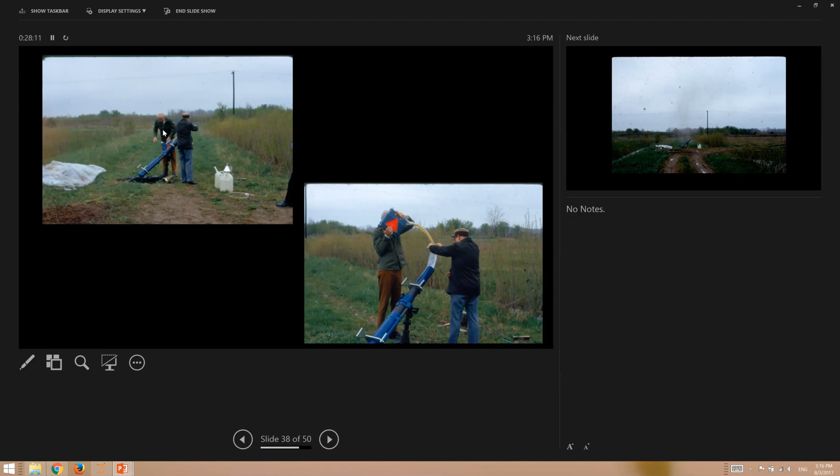And this is all there is, water vapor. And we traced SH wave refraction for 2 miles. Now, it wasn't a 2-mile wavelength, but we were able to trace refraction using the SH component.

So I've shown you sort of the old man's version of plucking and steady state, and I hope that we can agree that it's mainly a matter of scale. Thank you.

Sir, how many real mortars have you fired? I'm sorry, how many what? Real mortars. Real mortars that I fired. Yeah, maybe a Pendleton or something like that. One. Several times, but it was the same mortar.

Okay. Now, the Swiss have started to explore that same concept, and they built just a vertical column with an explosive chamber at the bottom and filled it with water. They could make the chamber longer or shorter depending on how long they wanted the pulse. And they tested a bridge that way, but apparently it was not particularly cost-effective or technically effective, and they did it only once.

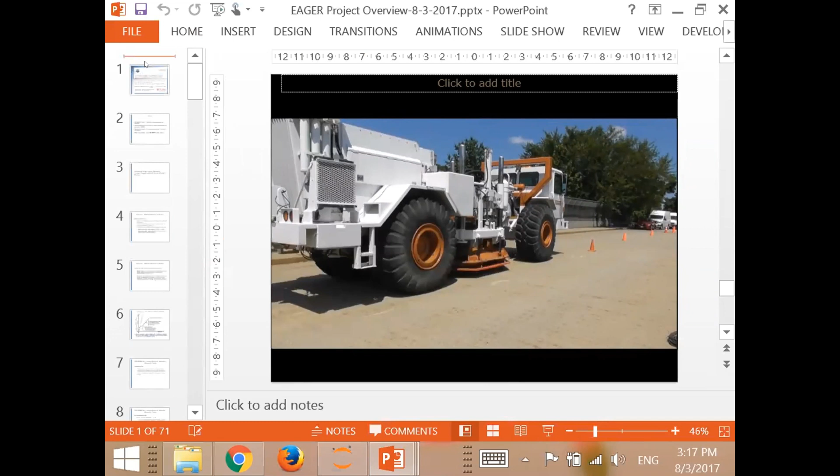Okay, well, thank you, Professor Woods, for discussing that. You have been a pioneer in dynamic testing for many years. You just like him because he's a sharpshooter. Yeah, he's a great sharpshooter, so be careful. That is true as well, I'm sure.

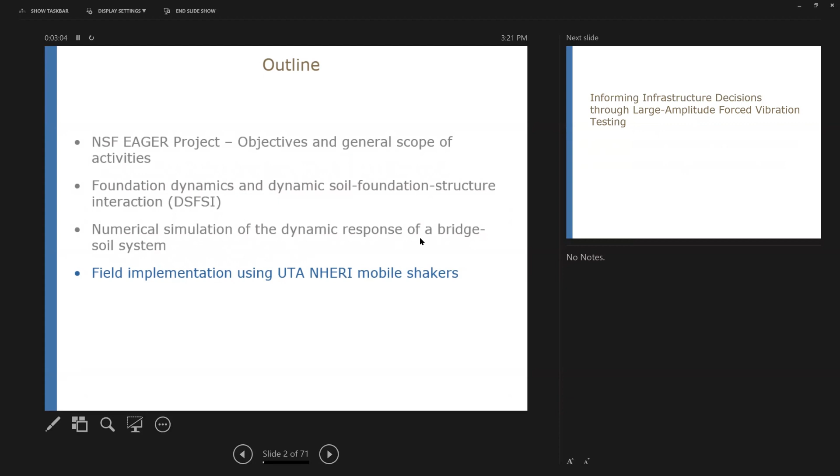So what are we expecting to see in our bridge? Very briefly, I will also say a bit about another activity going in parallel, related to numerical simulation of these bridge soil systems. But most of the presentation will be related to field implementation, because that is why this workshop was organized.

Okay, so this is the name of the project: informing infrastructure decisions through large amplitude forced vibration testing.

So a little bit about motivation for this research. We are all well aware that we are dealing with aging infrastructure, and as such we would certainly like to have some kind of tools where we can make safety assessments.

How we typically assess those structures, there is the whole field of structural identification, and my colleague Frank Moon will speak about it, that is his area. There were huge advances in the past few decades in terms of sensing technologies, simulation models, and procedures or algorithms developed for calibration of those models.

This is where Professor Woods' talk perfectly fits. What is the problem? The problem is what kind of input we have in our testing. If we speak about static loading, there's pull release, impact, shakers - these are all still relatively low-level inputs, which can provide information only maybe similar to operational limit states. So we do not get information which would give hints about what we can expect regarding the performance of structures once we get to extreme events. That's what we would like to do by introducing high intensity loads using mobile shakers.

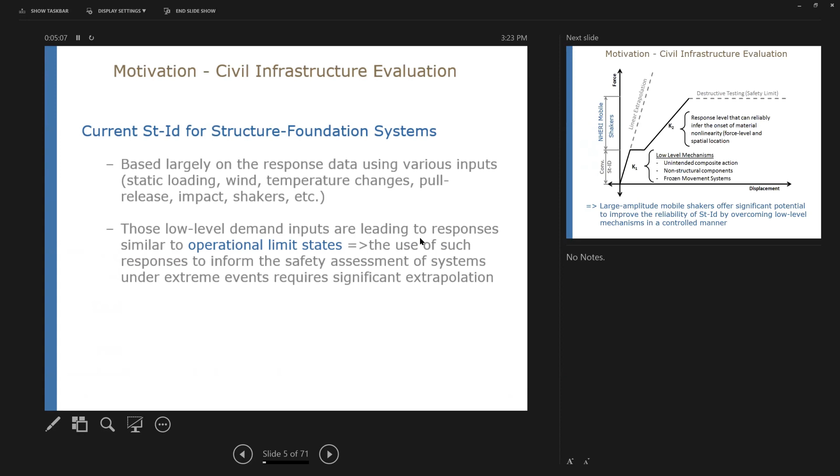This could also be illustrated this way. What we can say is that conventional structural identification is in a zone where we also have low-level mechanisms, like unintended composite actions, non-structural components, frozen movement systems. Like for our bridge, it could be.

This doesn't show. Yeah, oh, this one is better.

And we can say that we can approach the safety limit. As you're going to see, this is what we are trying to see, and there will be a brief discussion: are we starting to see any non-linearities by applying loading from shakers?

Okay, so very directly about the goal of the project. This is our overarching goal: to explore and hopefully establish the ability of these shakers to be used in performance evaluation of structures and prediction of future performance. But there is one distinction - unlike how we are currently evaluating bridges, we would also like to bring into consideration dynamic soil structure interaction.

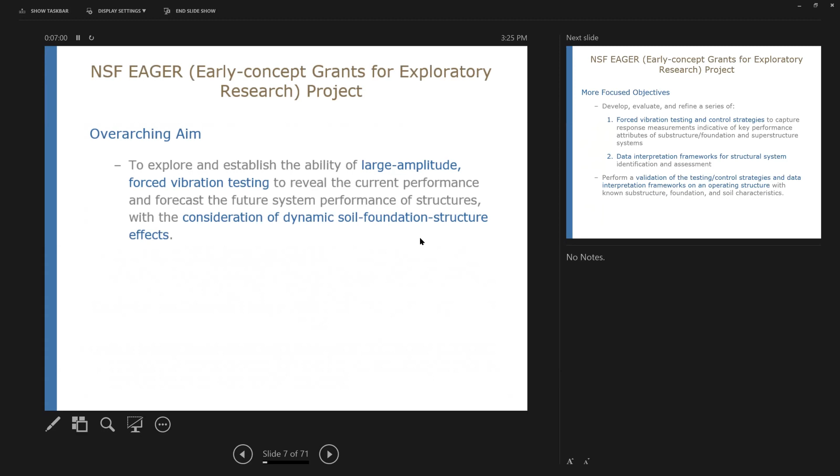So how to develop data interpretation frameworks - if we go on a bridge, how can we interpret that data to get an understanding of the performance of structures. And finally, what we identified in the proposal, this is why we are here today: once we develop these strategies for testing and for data analysis, can we validate them by deploying our mobile shakers on a bridge and analyzing the data?

Okay, so probably we can skip all of those.

As you're going to see later as we start describing our validation testing, when we were thinking about what we would like to do - yes, this would be ideal, that we deploy this high intensity shaking on the bridge structure and evaluate the response, not just of the structure but also of the ground. We hope we will be able to infer from measurement of those vibrations of the ground the significance of dynamic soil structure interaction.

For those who are not that familiar with foundation dynamics and some basic facts about dynamic soil structure interaction: what we are trying to encompass in evaluation of the dynamic response is loss of energy through wave propagation, which is not being considered. Structural models are mostly assuming a fixed base.

If we think about the effects of soil and soil structure interaction, something more familiar is that soil, when talking about earthquake loading, leads to amplification of motion. But regarding the effect of soil on dynamic soil structure interaction, first soil flexibility changes the flexibility of the overall system, and the fundamental frequency of that joint system goes down.

What is a very important effect, and you are going to see some results even from, I guess, the mid-60s in Professor Woods' book, is that this radiation of energy through wave propagation causes a major increase in the overall equivalent damping ratio of the soil structure system.

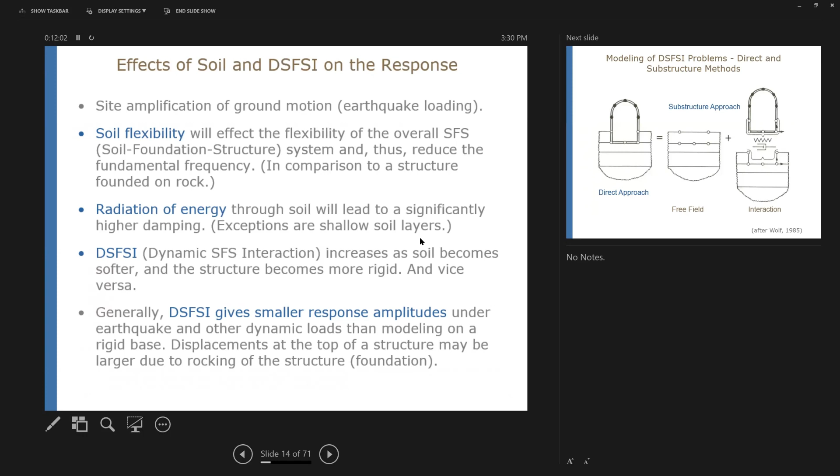Now, what is important for the modeling, which I will briefly describe: we can always do modeling of these soil structure interaction problems using the direct approach, which means we model everything together. That is going to quadruple or even more the computational power needed to analyze such structures.

The other approach is the substructure approach, which pretty much describes the problem for earthquake loading analysis. In general, what we are trying to do is separately describe the soil system and separately the structure. So we analyze the soil system to develop what we describe as impedance functions, and those impedance functions are then attached to the base of the structure.

So what are those impedance functions? These are different solutions developed from analytical or numerical solutions for any possible situation: any shape of foundation, surface or embedded, on or in a layered system. Various kinds of solutions, but in most cases we can describe those in a very simple form as described here by this expression.

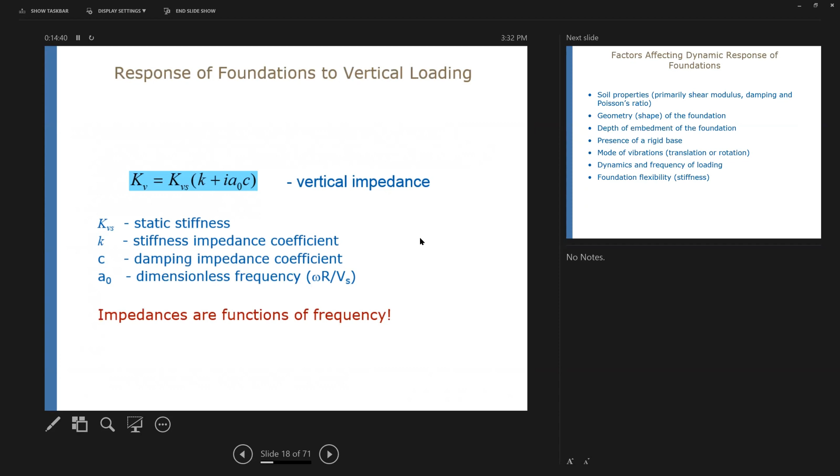And they depend on many elements. They depend on soil properties, primarily shear modulus, damping, and Poisson's ratio. They depend on shape of the foundation, depth of embedment, presence of a rigid base. And we are thinking that on our site, Hobson Avenue Bridge, where we will go tomorrow, we might have this situation where we are testing on a stratum. It will also depend on mode of vibration, dynamics and frequency of loading, and foundation flexibility.

So just very briefly to show some of these: there are various modes, translational modes and rotational modes. You will see that we will be primarily interested, on our bridge, in the vertical and swaying modes.

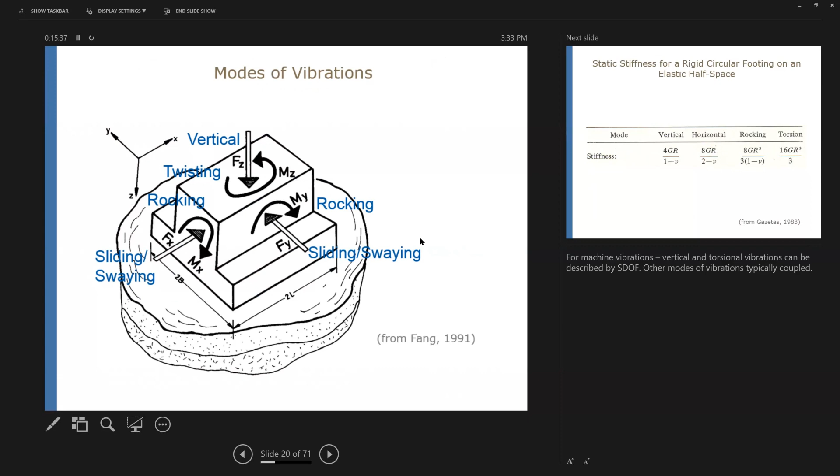So just a simple example: let's say this is for a circular foundation on a half space. Static stiffnesses will look like this, with modulus of soil, shear modulus of soil, radius, and Poisson's ratio as components. While those stiffness and damping coefficients are, as we said, a function of frequency, and as you can see, they can vary significantly.

Okay, going to the research from the 60s and Professor Woods' book. So here you can see, for those who are from structures, you know that you are typically dealing with damping ratios of about 2-3%.

If you look at what would be the damping ratio for a foundation or any kind of rigid structure on soil, these are so-called mass ratio, and if that structure is light, we might get damping ratios, for example, for vertical motion on the order of 40%.

As you can see, translational modes are more damped than rotational modes, so rocking is providing lower damping.

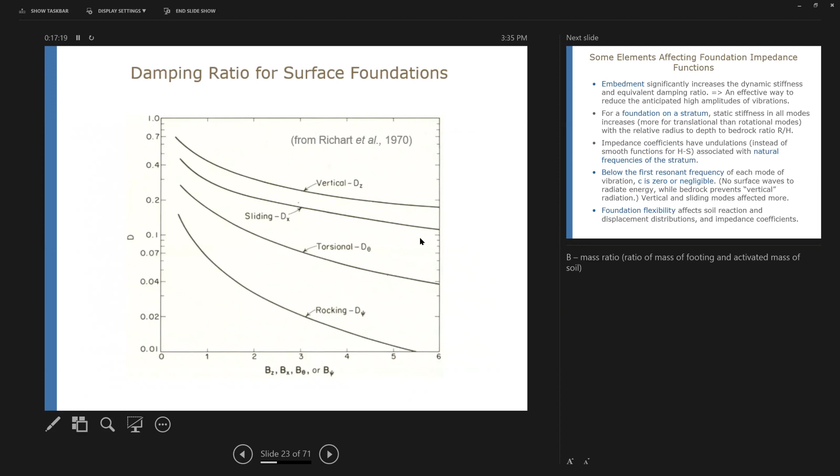I think for the sake of time, I'm going to skip some of those. This might be of interest for what we are currently doing on our bridge. I said that we might have below us a stratum based on some measurements.

If that is the case, every stratum has its own natural frequency, and if you excite at that frequency, what you get for the foundation is very low damping. For low frequencies, which is typically the fundamental frequency of the stratum, you have very low damping. The reason is there is very little surface wave propagation, and body waves, as they propagate, cannot propagate - they are simply reflected, so you are not propagating energy.

Okay, we can probably skip some of those. These impedances we have implemented into our numerical models to conduct a parametric study to evaluate what is important for the response of this bridge-soil system. We are not going to speak much about the results, but we can show at least what we are doing.

First we started at the very beginning with this 2D model of a hypothetical bridge. We probably spent almost 9 months identifying the bridge and getting permission to do the testing, so we did not know what was going to be the bridge - we were conducting the study on a hypothetical bridge structure.

The first analysis was done on 2D models, Sharif Farag was doing the study, and as you can see, the variables we concentrated on were the soil velocity, which we varied between 200 and 400.

We assumed we are talking about circular footings under piers, and we also varied column height - this ratio between column height, or the height of the building, and the width of the building, which we typically call slenderness ratio. What is important about this slenderness ratio is that if you have a higher slenderness ratio, the rocking motion of the building becomes more significant.

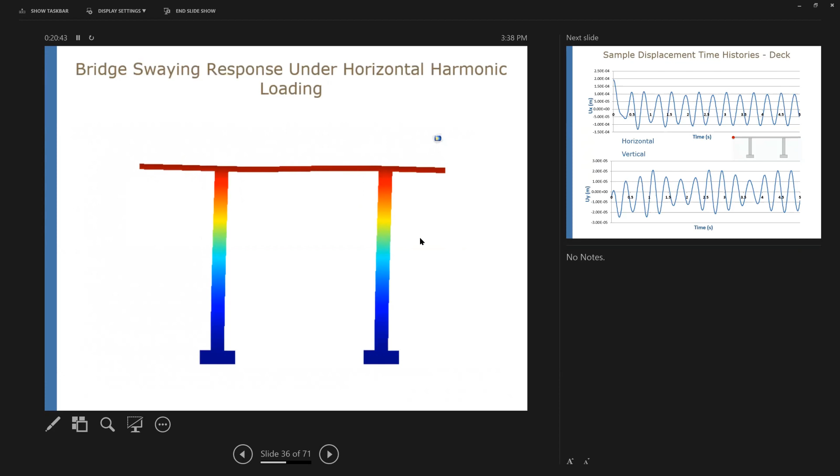You can see, for example, for one particular frequency, this would be for this point on the deck - harmonic loading, and we can see harmonic response. Clearly for the vertical motion of this point, it seems like there is a superposition of two motions: one might be as a result of tilting, another one of maybe the footing moving up and down.

Similarly, what we could evaluate from there is what is happening with the foundation. You can see that as we have this horizontal excitation, we are at the same time observing horizontal sliding of the foundation, and we are also observing rotation, rocking of the footing at the same frequency.

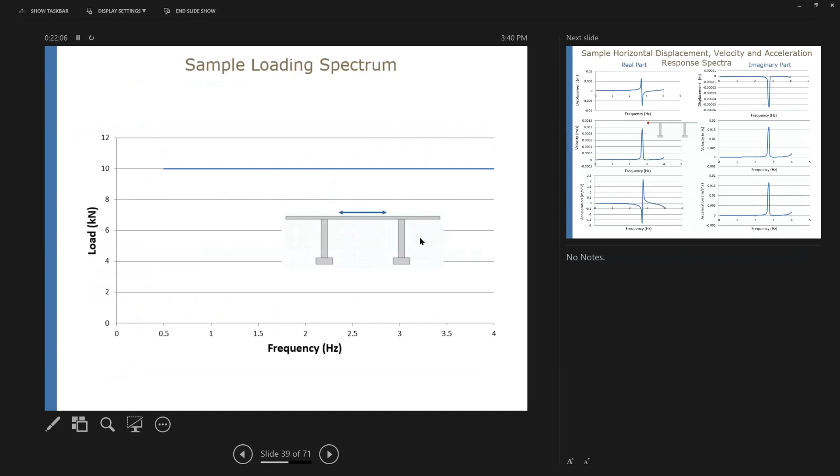The data were looked at in the time domain, but also in the frequency domain. So if this was our loading spectrum, for a range of frequencies of interest, say from 0.5 to 4 Hertz, with unit loading, we looked into various scenarios for what kind of responses we are going to get at any point on the structure or the foundation - how the spectra look, not just displacement spectra but also velocity and acceleration spectra, which will be of higher interest as we compare with our field data.

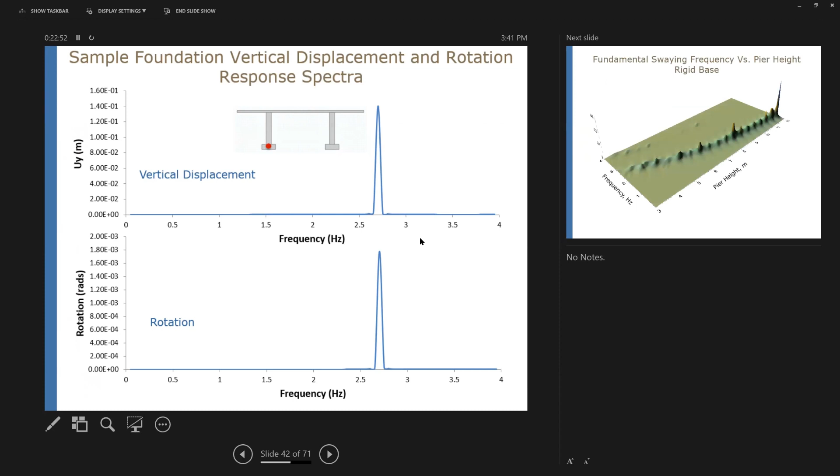Okay, similarly you can see for the rotation - there is this general fundamental frequency of this soil-structure system, and if you compare this frequency, it would be the same as for the superstructure.

We are looking into how we can present this data, and as you can see, for example, if we would increase pier height, which means increase the slenderness ratio, we would see a decrease in the fundamental frequency of the overall structure in this swaying motion.

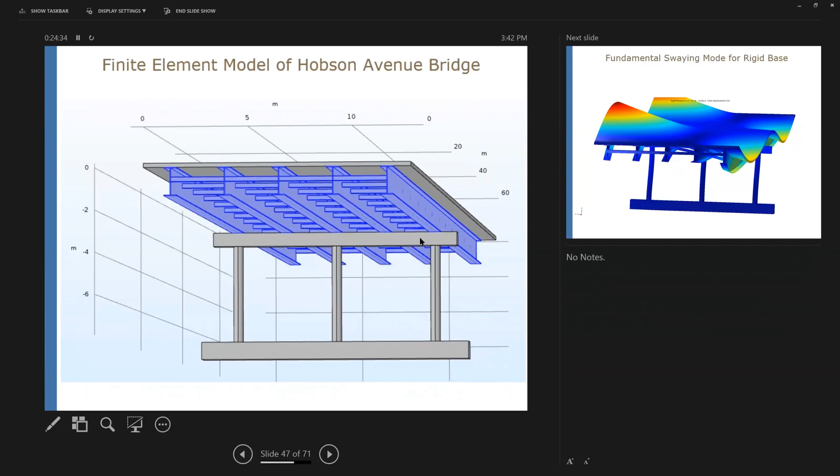And here you can see, so for example, if we went with the assumption that we have a rigid base, this is what would be the fundamental swaying mode of this bridge. It would be good to hear once we get results from the bridge deck whether the bridge deck is really doing something like this. Is that realistic?

I think it is. I felt it the other day, standing mid-span at the end. Everybody can judge tomorrow on the shape. You'll know. Okay, so maybe one number to remember, 4.7 Hertz was the numerical model.

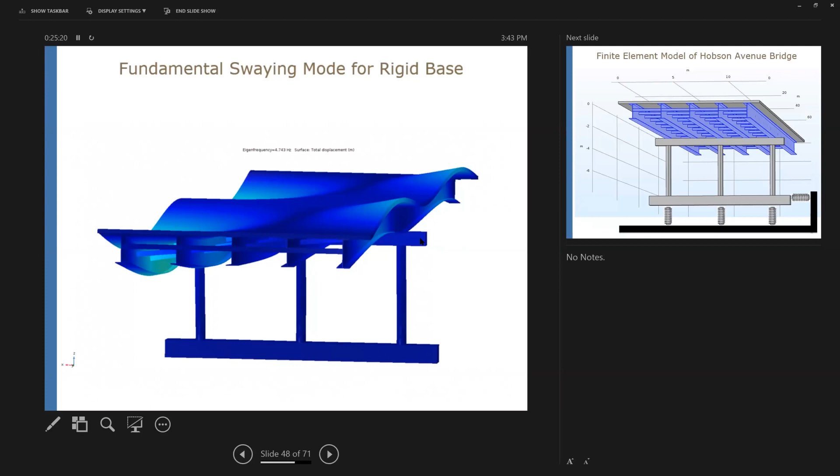But the same model was analyzed by including also impedance functions. So as you can see on the foundation, we were thinking of what should be the best model. Yes, the best model would be a large numerical model of the soil with embedded foundation, and we evaluated impedances that way.

But if we used existing solutions, should we use a single or multiple? Considering the length of the foundation, we felt it would be better to support with separate impedances below each of the piers. So there are three sets of springs, and it doesn't mean just these. There are also rotational springs which are not plotted here, which prevent rocking.

And what you can see now is that we are starting to see real rocking of this foundation. As a result, unfortunately this number is too small. If you remember, for rigid foundation it was 4.75; this one is about 4.65. So we got a decrease in the fundamental frequency of about 0.1 Hertz. But this is for the assumed soil conditions, and I think what we used, 200 meters per second, is higher than the actual velocity.

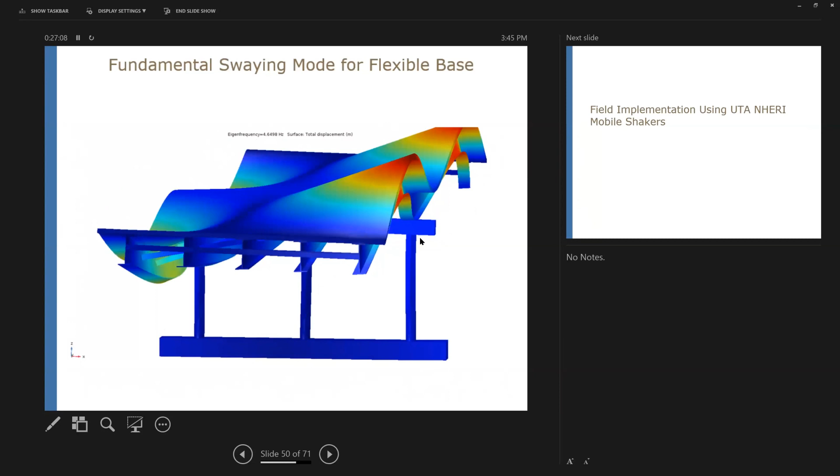Okay, so let's go to the most interesting part, and that is related to the deployment of University of Texas mobile shakers, in particular T-Rex.

So what are the objectives of our work? Well, the primary objective is to measure the response of all components, meaning components on the superstructure and substructure. Unfortunately, we could not dig down to the foundation, but we have placed so many sensors close to it that we can say it's almost the foundation and the ground in the vicinity of the structure.

We would also like to assess transmissibility, the transfer of motion between different components of this soil-structure system. We'd also like to see if we can use mobile shakers to at least estimate foundation impedances. Chances will probably be highest for vertical impedance, since the mobile shaker was placed directly above the foundation and the loading is through the piers. So for vertical impedance we might be the closest, but maybe we can think about our own inversion procedures to get a feel for the other impedances.

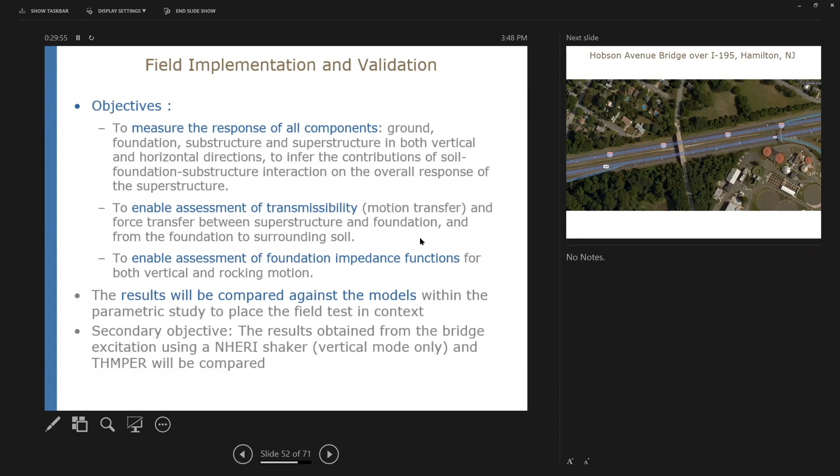Okay, a little bit about the bridge. So the bridge is approximately 30 miles south of here in Hamilton Township. It is crossing Interstate I-195, which runs east-west across New Jersey. We can say it's east of Trenton.

So it is a two-span bridge, continuous span, steel girders with a concrete bridge deck on steel girders. It is about 40 feet wide, so you can see, 40 feet. We have a sidewalk of about 6 feet on the western side.

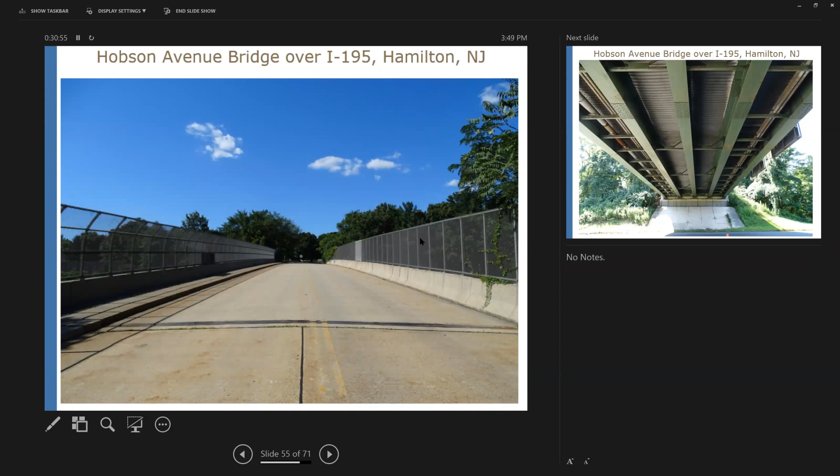So just a little bit of a look into the superstructure. Steel girders, 5 steel girders, continuous girders, supporting a concrete bridge deck.

The first part of the testing was on Monday when we first deployed all of the sensors on the ground. But we also used this as an opportunity to characterize the ground, because even the boring information we had was at locations a little bit away from the bridge, not on the bridge side.

The UT team deployed sensors and conducted MASW, multi-channel analysis of surface waves, along this line. An array of 24 geophones was deployed, and you'll see a little bit more.

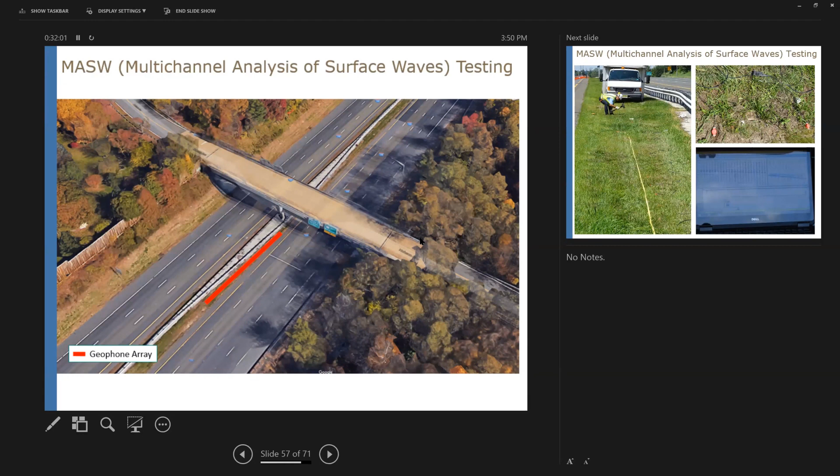Okay, so this is how it looked like. Hopefully you can see these are all geophones, 24 geophones, and a sledgehammer was used as a source. As you can see, a very nice set of data despite extremely heavy traffic. Something that was quite worrisome was what kind of measurements we'd get on the ground considering the intensity of traffic.

In a moment, Brady is going to speak a little bit about what was obtained from those measurements.

Moving to the next set of measurements which we have conducted and will conduct: vibrations induced using T-Rex. We will conduct tests in all 3 directions. I'm illustrating here the swaying test in the out-of-plane motion. T-Rex is going to be positioned at the center, just above the pier.

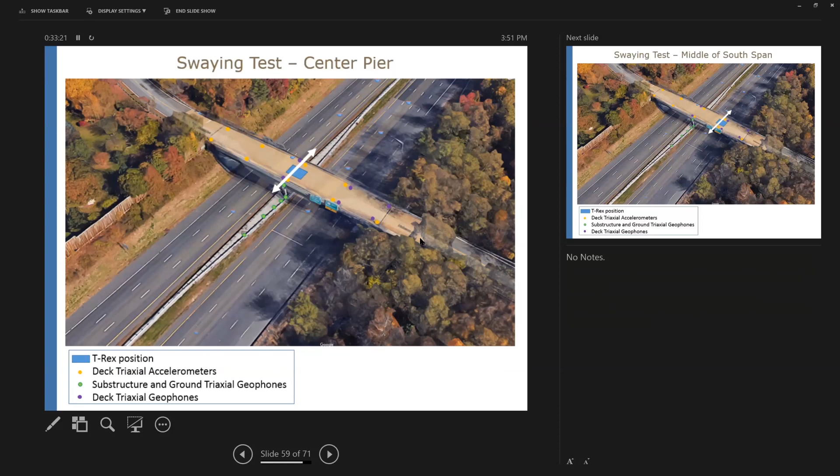The second test, which is going to be tomorrow when you visit, is going to be with T-Rex in the middle of the span. We expect that tomorrow the most exciting vibrations will be vertical, as we apply vertical loading. But in addition to vertical, we'll still have loading in the horizontal direction out of plane and also in the longitudinal direction of the bridge.

What else can you see, and in a moment you're going to see how those sensors were actually placed. There are triaxial geophones at all of these locations. There are accelerometers, and even more than what you see.

How many total accelerometers do you have? That's 28 accelerometers. They are placed along the curbs, along the barriers. Then we have geophones placed on top of the pier and on the ground at 5 locations - next to the footing, 5 feet, 10 feet, 20 feet, and 40 feet. There is even one more vertical sensor 80 feet away from the bridge. There are also 2 3D accelerometers on top of the pier.

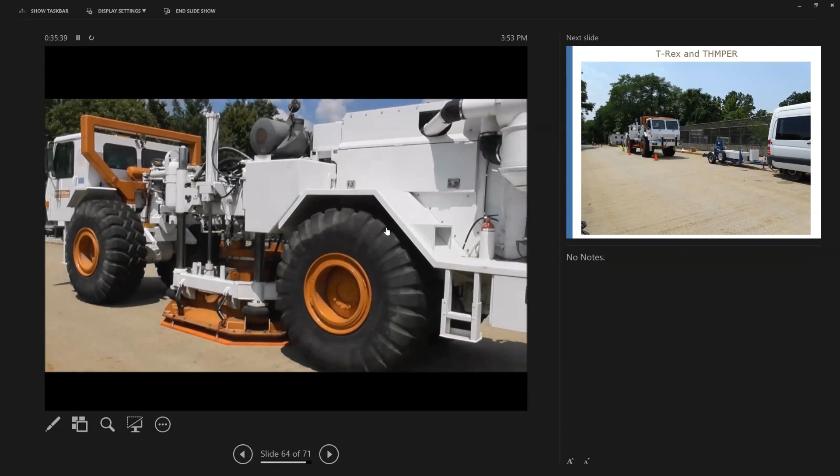But to get a real feel for what T-Rex was doing - we cannot have noise. No. So probably here you can see the motion of the shaker mass movement.

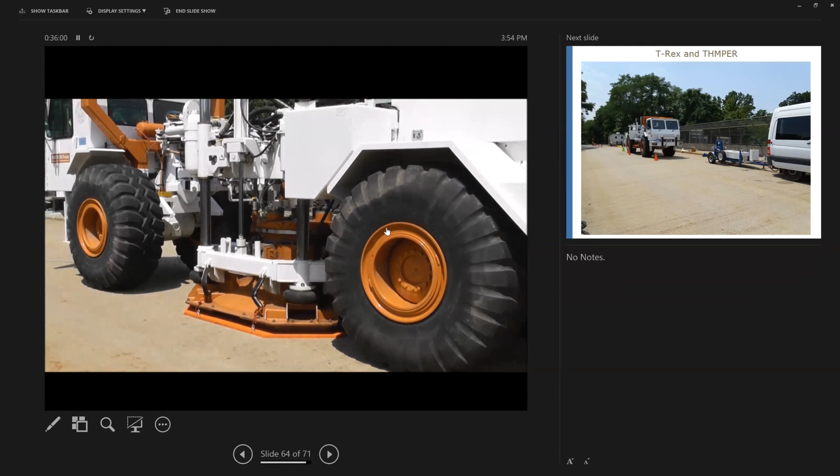So this is now inducing swaying of the bridge. And the sweeps we did, we had 2 sets of sweeps. One was from 15 to 1 hertz, and the second sweep was from 80 to 10 hertz. The intensity of loading was varied from anywhere from 3,000 pounds to 21,000 pounds. So there were 6 or 7 levels of loading because we were interested to see whether we'd start observing some non-linearity in the response.

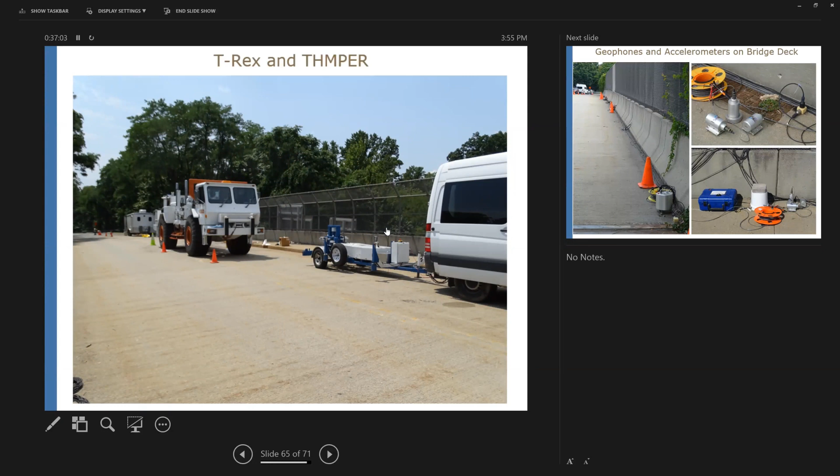Yeah, okay. So in addition to T-Rex, yesterday there was data collection using THMPER. Frank is going to speak a little bit about that. Maybe John is going to address a little bit about our sensors after loading.

So there were multiple triaxial geophone arrays - you can see 2 horizontals and 1 vertical. And here you can see 3 triaxial accelerometers, without 1. That's right, right - here it is only 2 directions.

I don't have a photo of this, I did not climb up there to place sensors. There are sensors on the top of the cap, because we also wanted to capture what kind of transmissibility or transmission we get from the deck to the pier.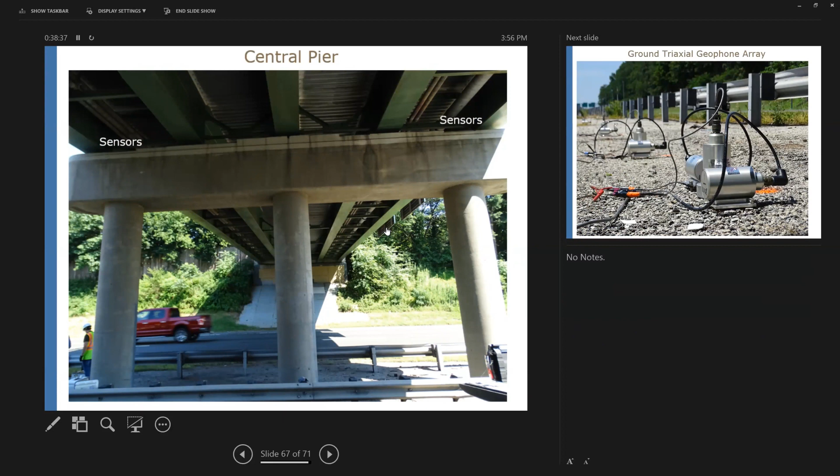I have already mentioned that there are geophone arrays on the ground, and as you can see, there are 5 such stations away from the pier, from 5 to 10, 20 feet.

So what are we trying to do with this project? Our guiding goal is, can we infer contributions of soil foundation substructure interaction on the overall response of the superstructure? The second is, and that's where John Levitis and Frank Moon are going to work, they have developed various procedures for structural identification of bridges. Can they extend it to also include the effects of dynamic soil structure interaction?

We really hope that this, as a pilot project, is going to succeed, so that at the end we can say yes, these NHERI shakers, when used at pretty high capacity but in a controlled manner, can really be used in evaluation. The reason we selected this bridge was simply because it was easy deployment. Otherwise, we would be very happy to go on a building. But what we would like to demonstrate through this is that these large amplitude forced vibrations can be used in the assessment close to the safety level of the structure.

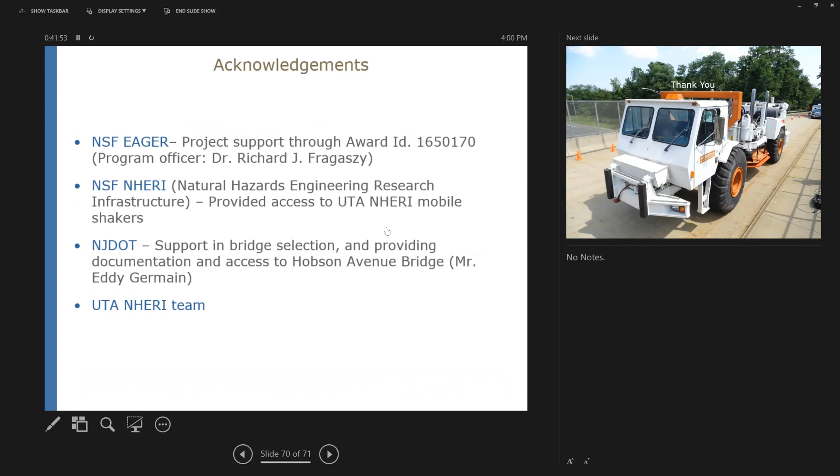So with this, I would like Brady to say a few words about what was processed last night.

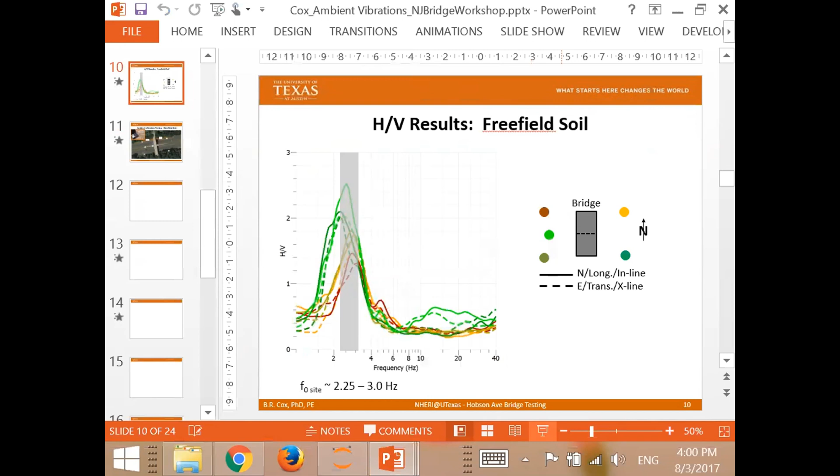We'll try and go quickly. We didn't really know what we were going to talk about because we didn't know what data we were going to collect and how much we'd be able to process. As Nenad said last night, we were trying to process data and put things together in some slides. I'm going to talk about the soil characterization, but also some ambient vibration recordings from our low frequency seismometers, not just on the soil but also on the structure. I'll show you some of the results we've gotten so far, and try to go as quickly as possible so we can make up some time if the computer will run.

I'm going to be talking about the dynamic site characterization as well as some ambient vibration analyses of both the site and the bridge. In terms of the dynamic site characterization, Nenad already introduced what we did. We did some surface wave testing.

It's surprising, especially for any older structures, sometimes it's really difficult to track down even something as simple as boring logs, so you don't really know what the subsurface profile is like. So we did some non-intrusive testing, and this is going to be very brief.

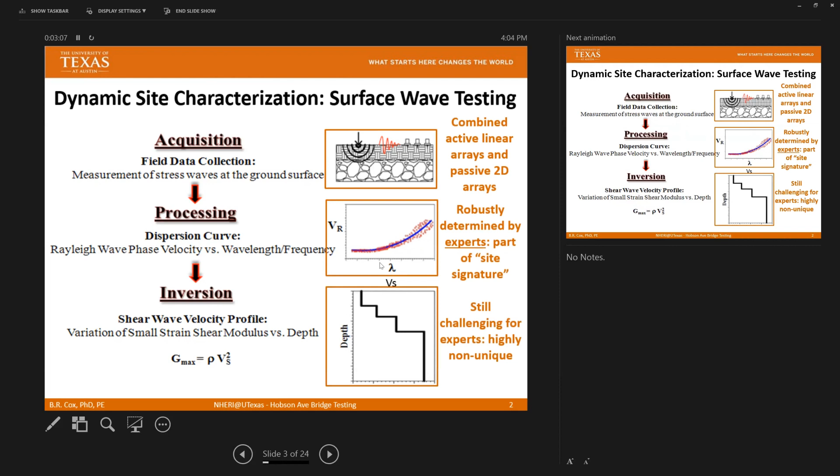So we can skip through most of this in the interest of time, but I'll briefly talk about it. We did active source MASW testing where we have an array of geophones across the ground surface. In this case, due to the limited space, we only used 24 geophones. We'll use as many as 48 sometimes, and we'll space them out anywhere from 1 to 2 meters up to 10 meters. We'll have very long arrays sometimes. We usually hit or shake with our trucks in different locations relative to the array to avoid things like near field effects and get different wave propagation paths.

And then a lot of times we'll deploy passive arrays where we'll have circular arrays of low frequency seismometers, which allows us to pick up really low frequency waves propagating through the site. But in this case, we only used MASW testing.

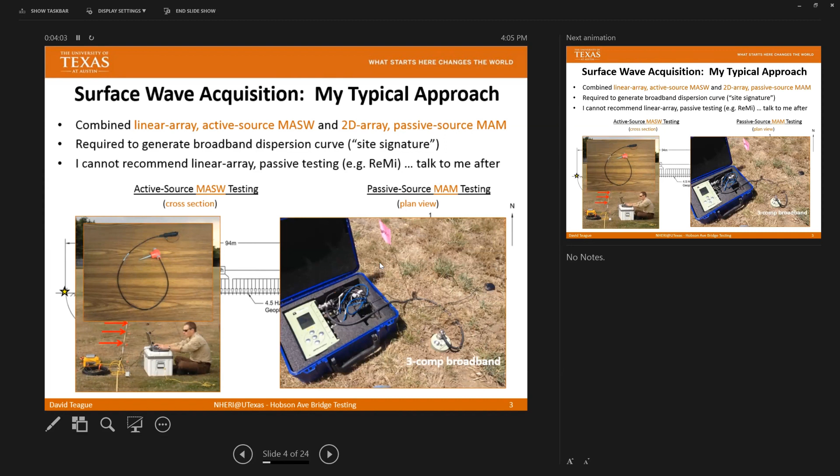Here's the array, and Nenad already showed that. We did 4 shot locations on either side of the array. We go through processing, 2-dimensional Fourier transforms. We take the waveforms, transform them from time to frequency, and transform space or the receiver locations from the spatial domain to the wave number domain.

So we do a 2-dimensional Fourier transform, and we get these beautiful color plots that look like this, where we can identify hopefully the fundamental mode of surface wave propagation and sometimes even higher modes of surface wave propagation through the soil layers. And from this dispersion data, we then have to go through a process of inversion to back out the shear wave velocity versus depth.

We haven't done that for the site yet because that actually takes a fair amount of time. It's easy to generate the dispersion data. It's much harder to do the inversion.

So what I can show you here is the data from the Hobson Avenue Bridge. This is the dispersion data we collected in terms of wavelength over here and frequency over here, so phase velocity. This is not shear wave velocity, this is Rayleigh wave velocity. We have to turn this into shear wave velocity versus depth when what we have is phase velocity versus wavelength or frequency.

The data was really high quality, which I was shocked because from the description, I thought this was going to be a relatively not very busy road. Maybe from New Jersey it's not a busy road, the bridge is not busy, but there's a full-blown 6-lane interstate under the bridge. It's busy, there's a lot of cars going by, and it's really loud. But we got excellent data, though I was shocked at how soft it was.

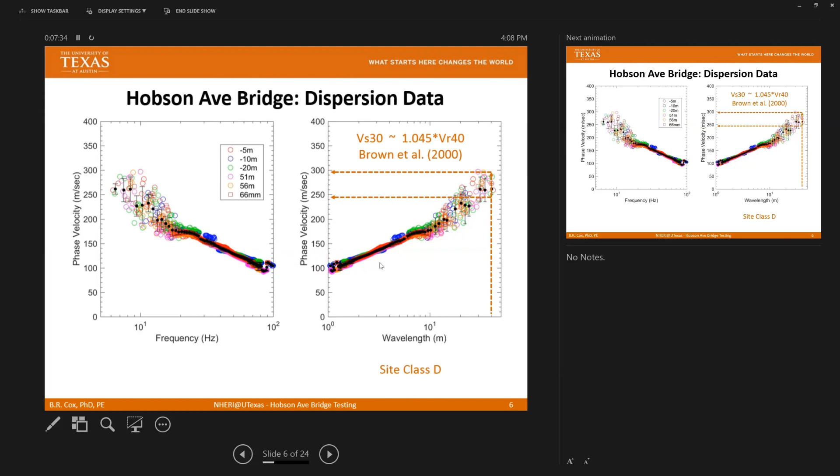That's a soft number. For those of you who are familiar, that's a site class D soil. Site class E is the worst soil classification, unless it's liquefiable, then it's F. But that's a soft site, okay?

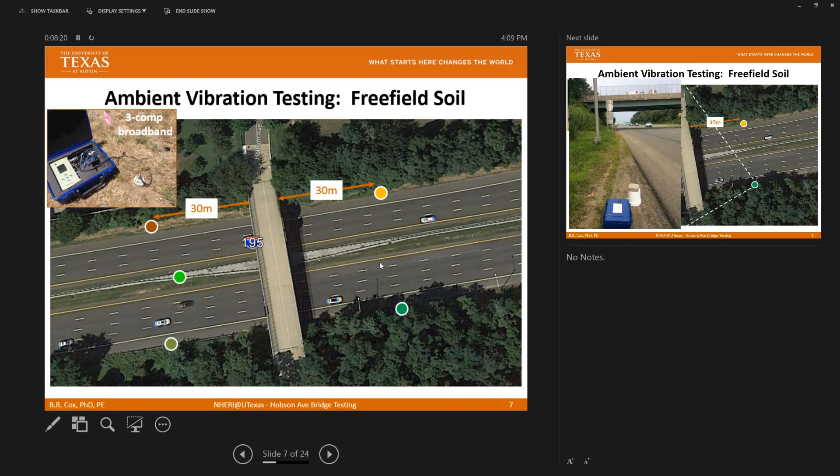Soft site. We did ambient vibration testing in the freefield. Each one of these dots, color-coded with different shades, a lot of them are kind of green, so we might have a hard time distinguishing them with this projector, but we deployed these broadband seismometers in the freefield, about 30 meters from each quadrant of the bridge, and then one here in the median. We weren't able to do a lot of measurements here just because of the traffic and installing all of our sensors and stuff. But I'm going to show you our results from ambient vibration testing in the freefield using these stations.

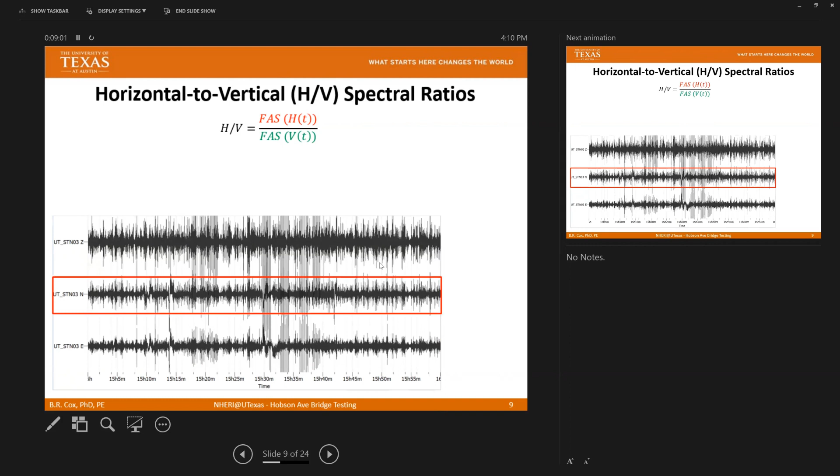If you take the ratio of the Fourier amplitude spectrum of the horizontal component, in this case the north component, and divide that by the Fourier amplitude spectrum of the vertical component, we call this a horizontal to vertical spectral ratio. We do that division on different time windows - this happens to be 30-second windows over an hour, so there's 120 time windows. We get something that looks like this: frequency versus H over V amplitude - horizontal to vertical amplitude. There's a nice peak, and we get a fundamental frequency of the site.

Now there's reasons for this. One school of thought is this is the fundamental shear wave transfer function of vertically propagating shear waves, which have high horizontal motion and low vertical motion. Another school of thought is this is something to do with Rayleigh wave ellipticity - surface waves at the resonant frequency of the site tend to lose the vertical component of motion, so you get high horizontal motions relative to vertical. Regardless, we know that this horizontal to vertical spectral ratio provides a really good estimate of the fundamental frequency of the site, and we can use it to constrain the depth to bedrock when we do inversions to get our shear wave velocity profiles. There's this fundamental relationship where F naught, the fundamental frequency of the site, is approximately the average shear wave velocity down to bedrock divided by 4 times the thickness of the soil. So if we know something about the shear wave velocity, the thickness, and the fundamental frequency, all of these things work together to govern the dynamic response of the soil.

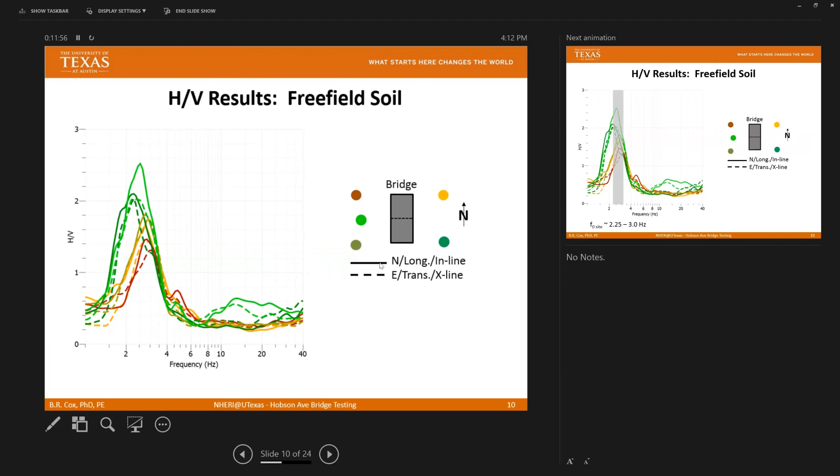We can add in some more locations relative to these other freefield sensors, and there's some variability there. The frequencies vary a little bit, but by and large, the fundamental frequency of the site around the bridge is somewhere between 2.25 and 3 hertz based on our ambient vibration recordings. So remember that number as we start looking at what's happening with the bridge.

If we look at the near field soil, so when I say near field, I mean... we missed a slide. What's happening here?

So we deployed these stations also right next to the piers. I'm showing them kind of on the outside, but they were literally almost touching either pier underneath this central bent here.

So we're looking at these 2 locations. If you take the horizontal to vertical spectral ratio of those locations, solid lines are the longitudinal and dashed lines are the transverse. You can see some differences in amplitude of the longitudinal versus the transverse components, but they're very similar from one side of the bent to the other.

So they're similar to one another, but the differences now exist in the longitudinal direction versus the transverse direction. Interestingly, you're getting a big response still at the fundamental period of the site, but the amplitude is going up, and then you're seeing some higher modes up here that are something to do with this soil foundation interaction, but they're pretty high frequencies.

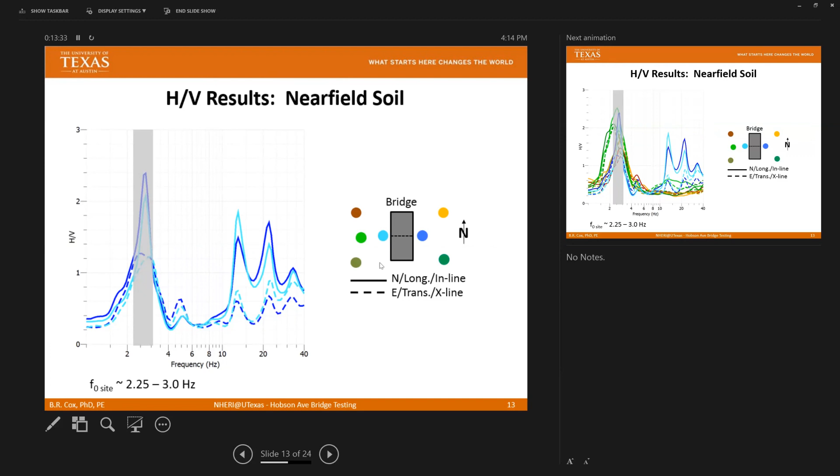If you look at all the soil response curves relative to the near field soil, so the free field versus the near field, everything's still happening at that same frequency, the fundamental frequency of the site, at least here, minus this stuff that's going on at higher frequencies.

Okay, what about the bridge deck? We deployed stations, also these broadband stations on the bridge deck here. I'm going to show some results from those. They were up here next to the sidewalk and next to the Jersey barrier. Here are the H/V results from the bridge deck.

Why in the world would we do this on the bridge deck? Why take a horizontal to vertical spectral ratio on a structure? This reasoning falls apart. And as I was talking with Frank about this the other day, we've done this on ridges, we look at topographic amplification. This tends to work. This is the first time I've ever done this on a structure.

So we took a horizontal to vertical spectral ratio, and we get a nice peak right here at 2.75 hertz. My theory—these are again solid lines, so they're the inline components. And that is very interestingly right in the same zone as the fundamental frequency of the site.

Why? Is the bridge influencing the site, or is the site influencing the bridge? Something to think about. If you look at the transverse component, the horizontal to vertical spectral ratio, there's a little bit of a hump there, but there's also now this nice frequency popping up very close to 5 hertz.

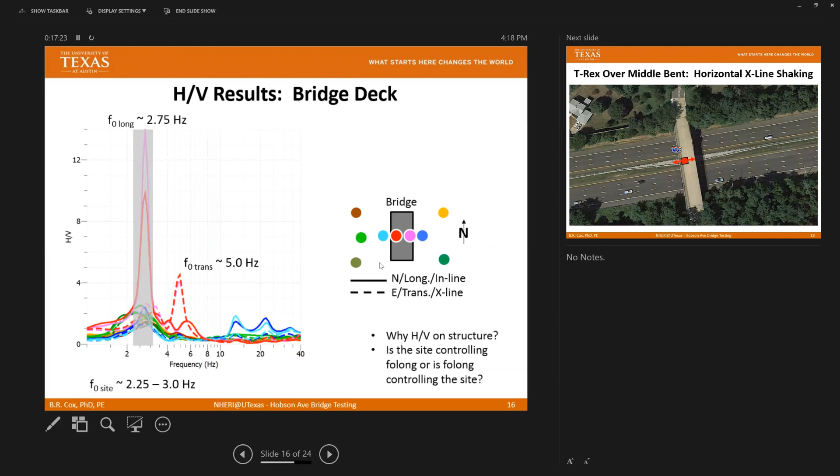So this is a little bit of vibration testing, or processing, that we've done so far. I think it's interesting to look at how the site is contributing to what the structure is doing, and to try and couple that movement together. I'm going to turn the time over now to Menq to show some very, very preliminary results from T-Rex testing.

Wouldn't the transverse direction be softer than the longitudinal? I would have expected. Frank? Yeah, I don't think so. Mainly because longitudinally, the only thing that's supporting the bridge is the pier out of plane, with expansion joints isolated from the abutment. So tomorrow when we go out there, if you stand across the expansion joints while we're driving it longitudinally, the foot on the bridge feels the vibration of the foot off the bridge.

So the bridge deck and the pier can just slide - at some point the back wall of the abutment closes off the joint completely. But that surface you're driving on doesn't move laterally, that's longitudinal. So when you're twisting it, it's just because it's such a long thing that it doesn't have much resistance longitudinally.

So what does the deck look like right in the middle? Is it two pieces as well, or is there one continuous deck all the way across? There's a pier, and it's just moving like a single degree of freedom oscillator in this direction, with rollers on either end basically. I don't know what these bearings are, probably, but it's also a roller.

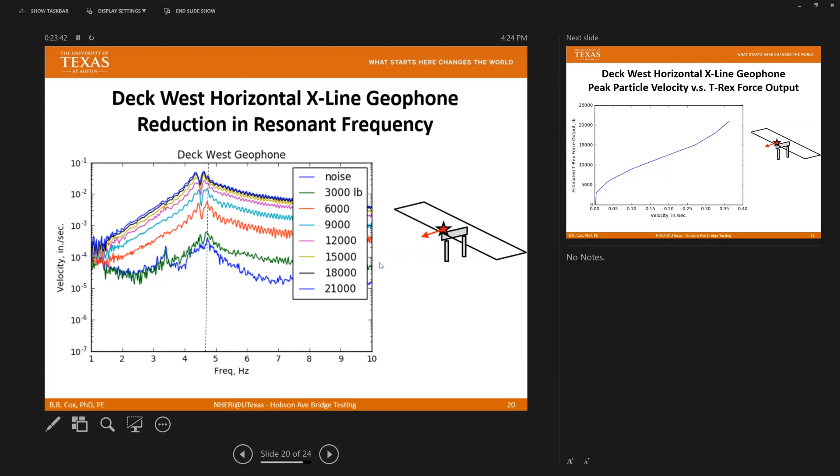I have a Jupyter notebook to show you the different sensors. You can look at it later, but for the sake of time, I'm going to show you two sensors to emphasize the importance of using T-Rex. This is two vertical components, on both ends of the bridge deck. So if you do a transfer function between them, you'll see that it's supposed to be almost the same amplitude if it's assuming pure rocking, right?

But wait, it's always doing coupled rocking and sliding. Yes, because you've got these forces at different points, but still, it's going to be dominated by the rocking. So if you do noise, you don't get phase. That's the point of our course.

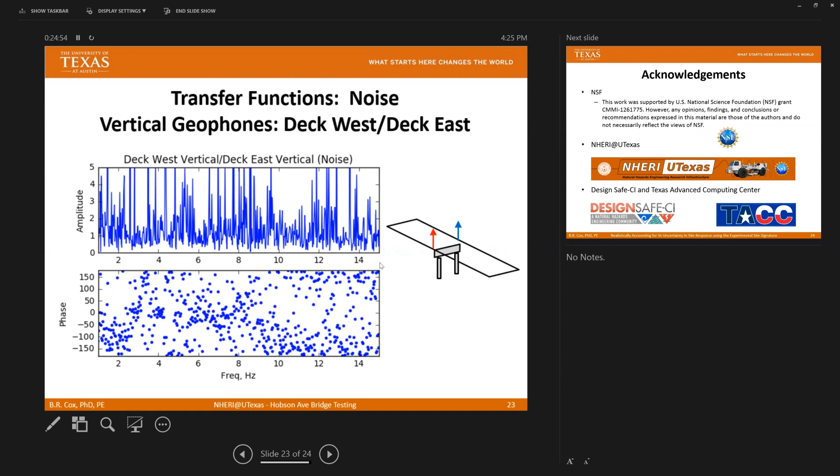But if you didn't create any real nonlinearities in the soil that changed the soil, I would expect it to come back. I wouldn't expect it so much to be nonlinearities elsewhere. Do you see it in the damping? Do you see damping increasing with amplitude? No, not particularly, we haven't had a lot of time.

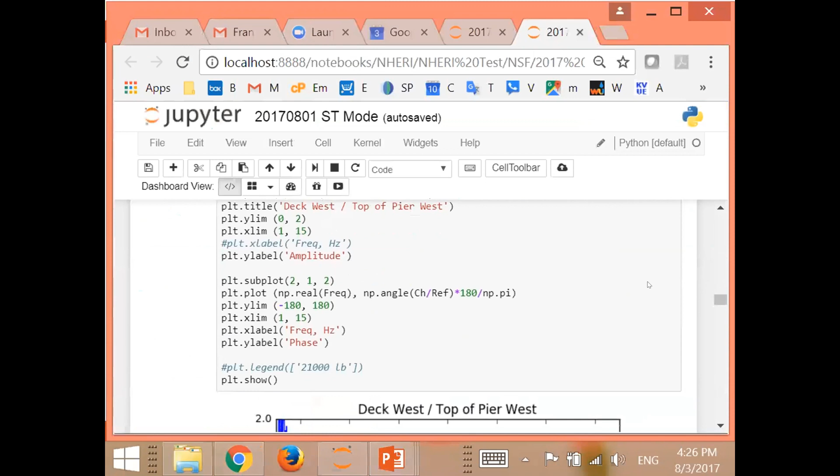Yeah, scrutinize things, there's a lot of sensors. John is going to talk about some stuff in a minute too, but I think people have just literally scratched a very minimal surface of a lot of this. So there is a lot running through the slides for you.

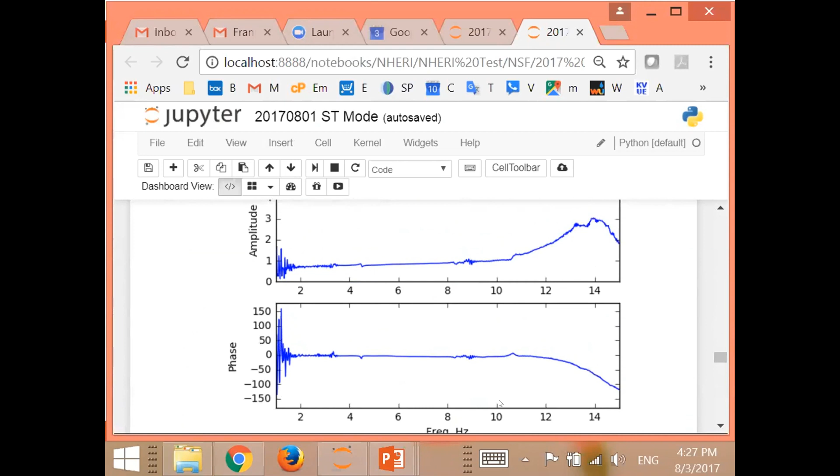In the foundation, you'll have to see what you can, if you come about it. Again, this is noise. Start looking at strains or something. What kind of strains would be needed to create a phase shift like that? Let's say if it came from the foundation, to see if it looks like it's still reasonably linear, so it's going down a bit, which won't hurt the soil.

Sorry, can you go back to what you just asked? There's a conversation going on about this.

Which one? I just want to point out that what Mung was showing very briefly is a Jupyter notebook that he's created. Jupyter notebooks are free and open source, and you can use it just like MATLAB. DesignSafe supports Jupyter notebooks, and he's created a notebook to analyze some of this data. This is the sort of thing that we'll pass on to the Rutgers crowd, and they can continue to use it and adapt it to their needs. This is what we would do for users, but this is something that potentially they could post on DesignSafe so that others could see how they analyze data for these solutions. Open access to data processing.

So then I tried to convince Joel Conte at San Diego, and we submitted a proposal on bridges with T-Rex, probably 2004 or 2005. And I think I can still see the smoke from it going down from the reviews. But this is really pleasing to see because our tail feathers were burning from those reviews. And so it's nice to see this data.

There we go. Due to this input, this is in the frequency domain, and this was just from the trigger signal that was sent to the shaker. And I just want to get an idea of the force levels for, this is 1 volt, 2 volt, 3 volt, and 4 volt, which I believe it's around 6,000 pounds per volt.

So I can go to 4 volts. I only go to 3.5. Close enough, yeah, all right. Especially when you're processing. Yeah.

Okay, so this is our force spectrum. And then the top would be the 1 volt time history. This is acceleration, and units are in G's. The bottom is the maximum amplitude signal that we put in. So we can see these are scaled similarly, so we can see kind of order of magnitude the responses that we're getting. And these are all of the accelerometers, both superstructure and substructure.

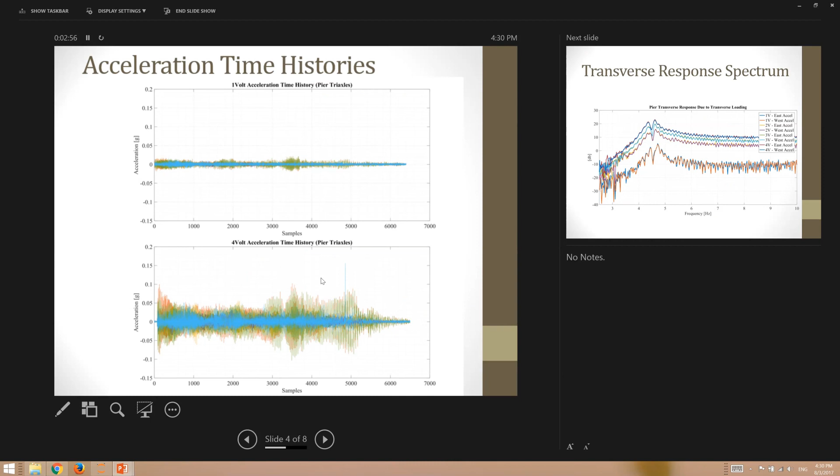So just order of magnitude comparison here. And now what this is, it's a little busy, but we have our 4 different loading amplitudes transversely, and this is for each transverse measurement. So we have a pair here, a pair here, a pair here, and a pair there. And so we see very consistent measurements between the 2 triaxials. And we also see, so this is on a log scale, the y-axis is the log scale.

If we remove that log scale and just make it linear here, we can see the shift in frequency due to the magnitude of the input. And so we start off at the low level at around, now this is just peak picking here, but this is about 4.7 hertz, 4.712 hertz, and at max we get around 4.614. So it's about a 1/10 of a hertz drop from our lowest magnitude to our max.

These 2 peaks were interesting, having these pairs of peaks going on. And so what I did then was I looked at, so we have our 2-span continuous, and I looked at a vertical accelerometer on an exterior girder above at the center of one of the spans, right? So this would be the maximum amplitude for a torsional mode, and this is vertical.

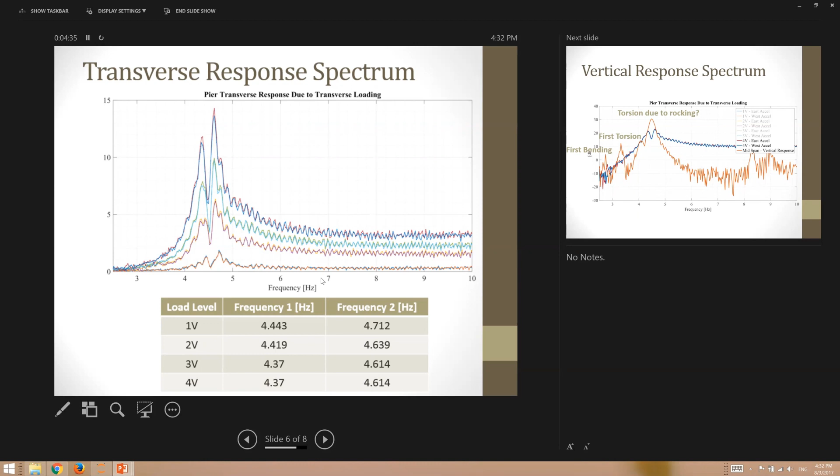And what we see, it's plotted here in red, and all that I'm showing is the maximum load level that we went up to. But what's interesting is these frequency measurements that, as a structural guy, first thing I think is, oh, this is first bending, this is first torsion, what's going on next? These are right around the 2.5, 3 hertz that we're seeing, but we also see a major amplitude right in between of those 2 peaks that we're measuring. And so, I mean, I don't know, but.

So you have the bridge as one continuous deck. Yes, that's because there's no joint here. Continuous steel also, one continuous. Because I see a bow and arrow or something. I mean, I see the flexural. Here's T-Rex as an arrow in the middle of when you're moving this bending.

Mm-hmm, and so that's what you're calling the first bending, I guess. No, the first bending would be vertical. Right, first bending of a vertical mode. So these would be both the spans. I think maybe bow and arrow, I'm confused. Yeah, I think the bow and arrow probably doesn't quite occur like that because there is a lot of play transversely in the abutment bearing. They put what they call an alignment bearing in there, but it has an 1/8 of an inch plus or minus. I'm not so sure we're bottoming that out.

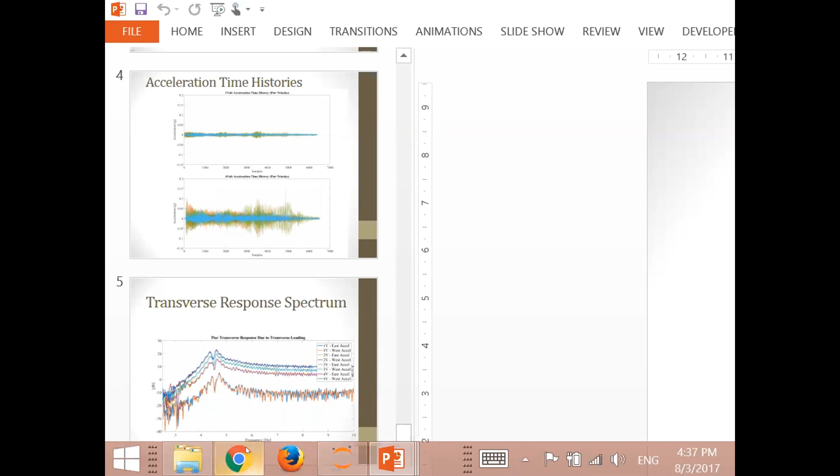Thank you. When you showed your plots, I thought the waveform started to change a little bit around resonance, in the resonant part. Why is there such a big jump between 1 and 2 volts to start out with? It's likely that at the low amplitude you have friction, you have to overcome that first for you to get started. I thought the same thing, by the way. But again, 1 to 2 is doubling, and then 2 to 3 is not doubling. So yes, that's correct, but it still looks like the waveform changed a bit.

That's detail. Well, I guess, okay, we need to look more into it. So should we—you just started it, so—take a break or should we keep going?

I think, notice Frank has his presentation, we want to listen to Frank. And we have some flexibility in doing the tour and what time we're doing it. Yeah, so I've just been texting one of the students that's setting it up. So we can either skip my talk, I can give this, and then we go up there at like 5 instead of 4:30. That's fine with us. I mean, I think most of us are here to listen. So you do what you feel comfortable with in terms of balancing your talk with the tour. We're having you just go off to the right here.

So this is a really general talk. What I wanted to do was present a little bit, at least from my perspective, on how global structural assessment is done right now from a structural engineering perspective, at least for bridges, which is an area I've been working in. My background is actually in earthquake engineering, I haven't done much work there for a few years. But one of the things that was really interesting today is hearing—I feel like I should have been a geotech, because you guys have a lot of the arguments that I have with my structures colleagues, it seems like you guys have already figured out. One, that scale is really exciting, that's actually what got me into engineering to begin with. Two, that field testing is really where you learn a lot of things. I did a lot of laboratory testing, but field testing is, I think, where research should be undertaken. And then third, that you can't just take a measurement and use the measurement.

You need a model to help you interpret what you have just measured. These may sound obvious, but I don't think they're necessarily universally accepted, at least in structure. I've been making this argument for a long time.

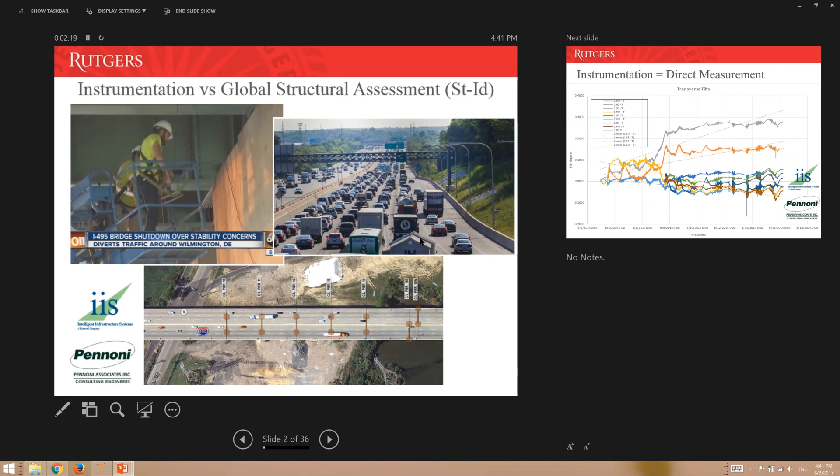Generally, we have this fundamental challenge, and this I don't think is as big a challenge for laboratory testing as it is field testing. The fundamental challenge is you can measure certain things, but what you measure is not what you need. So the things that I care about...

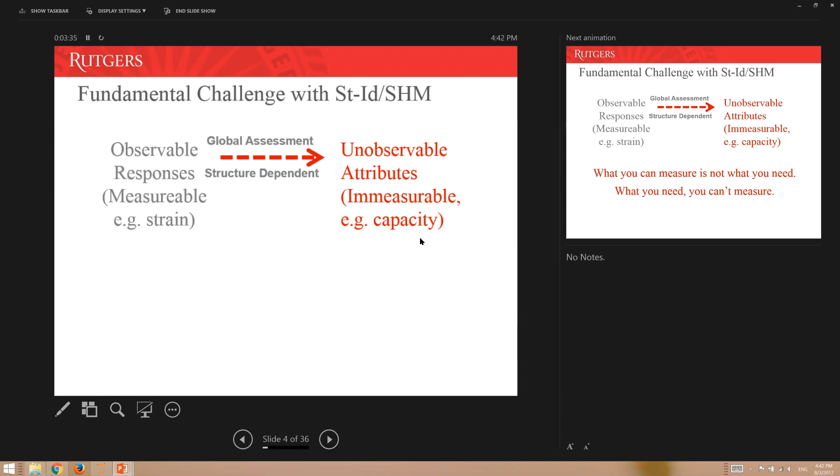So the things that I care about, maybe capacity, I cannot measure out in the field because I have to break something to do it. I can measure it in the laboratory, but out in the field I can measure strain, acceleration, displacements, all sorts of things. So I have to do this translation. What you measure is not what you need. What you need, you can't measure.

We have to remember that just because I can measure something doesn't mean it can tell me about what I care about. There is this very interesting translation that has to occur, and it is structure dependent, and that's why we need a model. We can calibrate a model, and we can then try to predict some of these things.

I noticed that you use millions of models for an inversion. We do the same thing because there are many, many models that match the data, and I think they all have to be considered as long as they're plausible. So this is not a clean process, but I think it's a necessary one.

So why is this so difficult? I won't go through all of this, but our structures are unique. We have very large and uncertain intrinsic forces. They're non-stationary, so they're different in winter and summer. They're complex, we have stick-slip mechanisms all over the place. If you go into mechanical engineering, where there's a lot of work in this area, their systems are way simpler in many cases. An airplane is a lot easier to model than a large bridge.

We have complex boundary conditions. You guys are all geotechs, you know about that. And our scales are very large, not only spatial, but also timescales.

We instrumented the Brooklyn Bridge a few years ago. That was built like the 1880s. That's a long time. It was completely reconfigured in the 1940s, and these things have been around for a long time. So assuming a standard connection performs the same everywhere on the bridge is not actually a generally very good assumption.

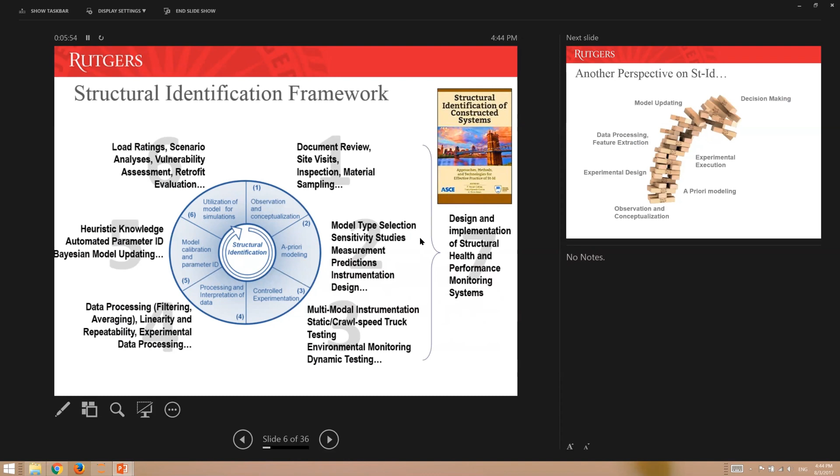Sounds great. It also could look like this.

If you don't observe or conceptualize the problem very well, it really doesn't matter if you carry out your experiment really, really well. You didn't design it properly, right? So it can certainly be unstable.

Before I get into just a few quick examples, the goal is to provide some context as to why I'm excited about something like T-Rex, because it fills a specific gap that I've seen in structural testing.

But there are distinct challenges. We have a lot of signature bridges in the Northeast, roughly $500 million to $1 billion replacement cost. They rarely get replaced. We're replacing a few right now, but in many cases the owner wants to indefinitely preserve them.

So they don't mind spending money on instrumentation, on learning about the structure, but they have to preserve it long term. Then you have the opposite problem where you have 600,000 of these common bridges. Nobody can spend a lot of money on any one of them, but as a whole they constitute a pretty significant asset class.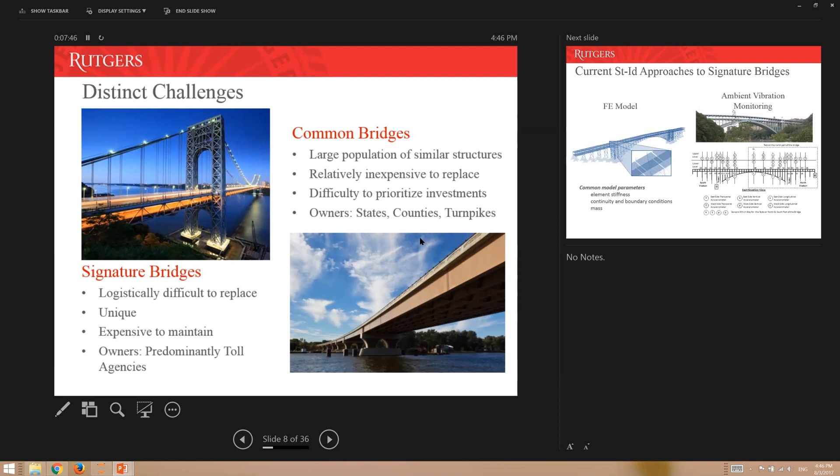The other thing to know is owners of these types of signature bridges generally have lots of money. For example, the George Washington Bridge probably brings in north of $1 billion a year—it's the most heavily traveled bridge in the world. A common bridge like this brings in no money. So states and counties that own these bridges are constantly struggling for funding, while owners of the signature bridges generally are not. It's a general statement, but it's typically true.

So what I would call the common approach, and this probably goes back 30 years, is to use ambient vibration. If you want to learn something about these bridges, you go out and put tons of accelerometers on them, and because they tend to be very long, you get traffic over them, you get a lot of excitation, and you process that assuming some sort of broadband white noise input. You can get frequencies and mode shapes, and update a model based on that.

I think it's true, actually. There's a couple things. One, this is output only—anytime you can get input and output, I can know more about the system I'm trying to characterize. Second, the magnitudes of the excitation are very small here. So when you have stick-slip mechanisms, which are all over the place, you're modeling a bridge in the stuck condition. An earthquake comes along, it's not stuck anymore. So the system you thought you were learning about is actually different than the system that's going to experience the earthquake. Another thing, a little bit of a tangent, but when we were doing the Brooklyn Bridge...

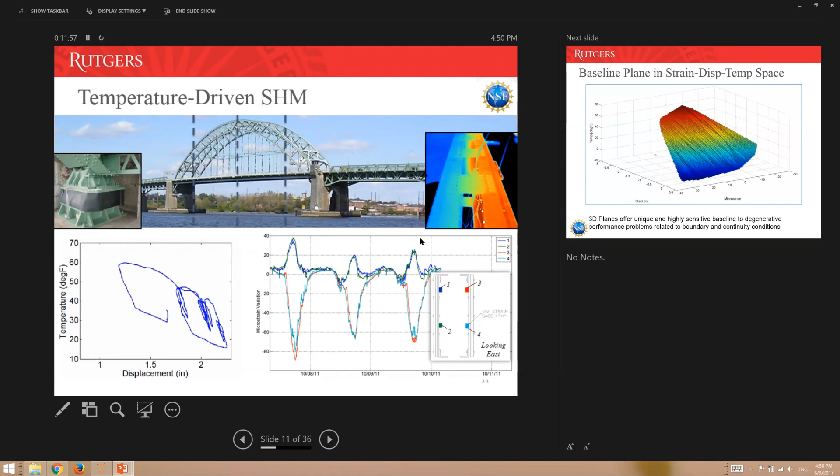So what I did a few years ago is we started looking at what if we use, so this is my third, right? We have impulse, we have steady state, then we have temperature. It's very slow, right? But you can take data over years and you can get cycles. And what you're looking at here is actually the hysteresis of a friction bearing that is changing with temperature. And I can model the temperature pretty well. I also can model where the sun is in the sky.

It turns out that's one thing that is almost deterministic. You know exactly where the sun is at any given time, right? And so you can simulate this, and then you can calibrate models to this. And one of the things that became really fascinating is going to play.

Maybe it won't play. No, it's not going to play for some reason.

In any case, if you plot for a few years of data, the temperature, the displacement of the expansion bearing, and any strain that is within the longitudinal load path of the structure, if you plot that, what you get is a flat plane in three-dimensional space. And you can derive that plane.

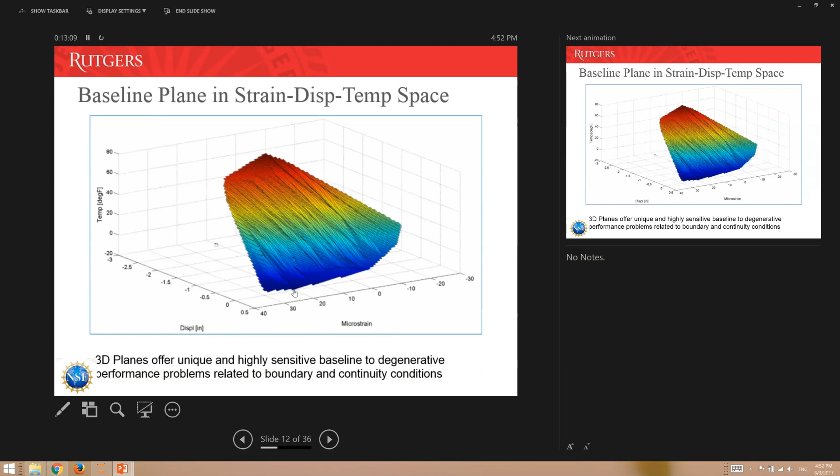Turns out that in order to do that, you need a stick-slip response at the bearing. And if you don't have any nonlinear, you don't get a plane, you just get a line. But that plane is very sensitive to any changes in the system itself. So if I lock up the bearing, if I fracture a member, if I soften connections, these planes change.

And we looked at a number of different damage scenarios for a particular bridge, and you can see the sensitivity, right? Hundreds of percent. If you look at the very common vibration-based sort of damage detection, it's almost completely insensitive to all of these things. Right? Here's the problem, right?

So the advantage of this was we knew the temperature, so we knew the input, we knew the output, right? So we could really get a good handle on our system. The second was that the forces are enormous. Right? If you go put a strain gauge on a bridge, the largest force you measure is when the sun comes up, right? And it can be, you know, several KSI of stress. We're not talking about noise level here.

Way more generally than a truck that drives across. So we had really good signal to noise. We were overcoming any stick slip. The problem with it is we need a lot of data.

So let's say your bridge damages. We can tell you in about a season, because we need to see all of those temperature cycles before we can start to say, oh, this plane has changed. Unless for some reason it jumps off.

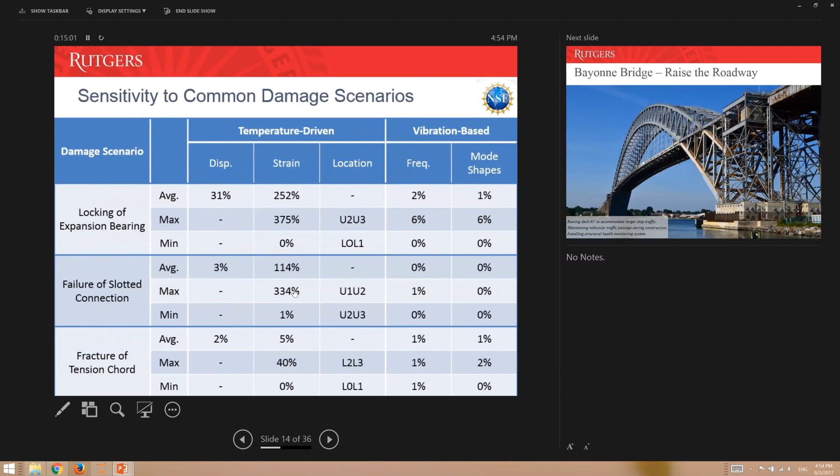So, based on this, we did instrumentation. I don't know if you guys are familiar with the Bayonne Bridge, but this deck is, I believe, almost gone. They've raised it 64 feet here, so they could get the new big post-Panamax ships underneath. So it's a $1.2 billion project, and they didn't even get a new bridge, right? They just raised it.

So we also do some monitoring. So this is another sort of, I guess you'd call this static excitation. This is a movable bridge. It's actually a bascule bridge. It's the third largest bascule bridge in the US. And so we have some cameras out there. You're riding up on this.

And what you're seeing here in response, which is pretty significant, that's 7 KSI of stress, starting at 0. That is changing the direction of gravity, right? So vast majority of stress in large bridges is dead load. And so when you start moving it, basically changing the direction of gravity, you can really impact its stress levels, and you can see the ship that goes underneath.

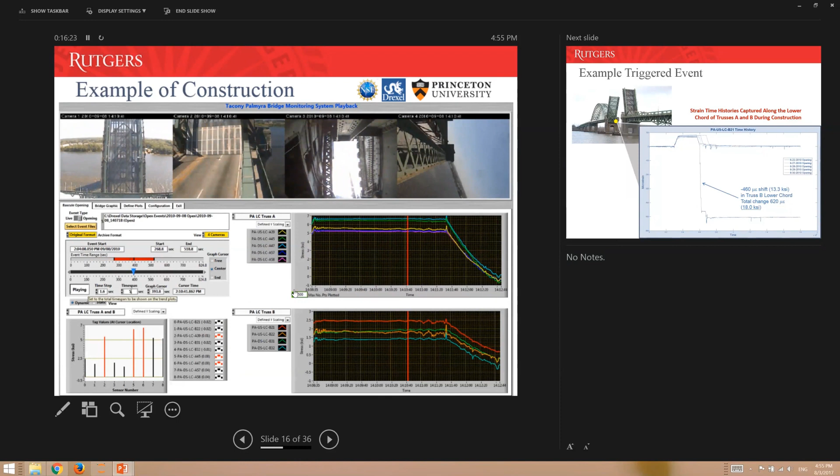We built this system to monitor this bridge while they were replacing the grid deck, because they had to make sure it was in balance. We wanted to sort of play around with some construction monitoring. And one of the things we found, which was quite interesting, is this, back 7 years ago now.

This is what it should look like, right? And then one day, this is what happened, right? An 18 KSI change in stress, about half the material strength.

And we were able, through modeling, to trace it to actually a connection slip, which we then traced to the contractor not following the proper procedure of drilling out a rivet, putting in a bolt, tightening the bolt, should yield the bolt, doing that for the entire connection plate, and then that night, when they close the bridge, loosen all the bolts, throw the old connection plate out, put a new connection plate in, tighten the bolts. During the day they didn't tighten the bolts, because at night they didn't want to have to take them out.

And then the plate slipped. It dumped. Fortunately, in this case, which is why we measured such a drop, there was a completely redundant truss. So it just basically went from one truss to the next. So a huge drop of force. And of course, we alerted the contractor.

And the interesting thing is they kicked a couple cameras into the water on accident, right? But it wasn't the camera. That's the interesting part, right? It's not the cameras. We didn't see them not tighten the bolt. You can just measure. So some things are easier to measure than to see.

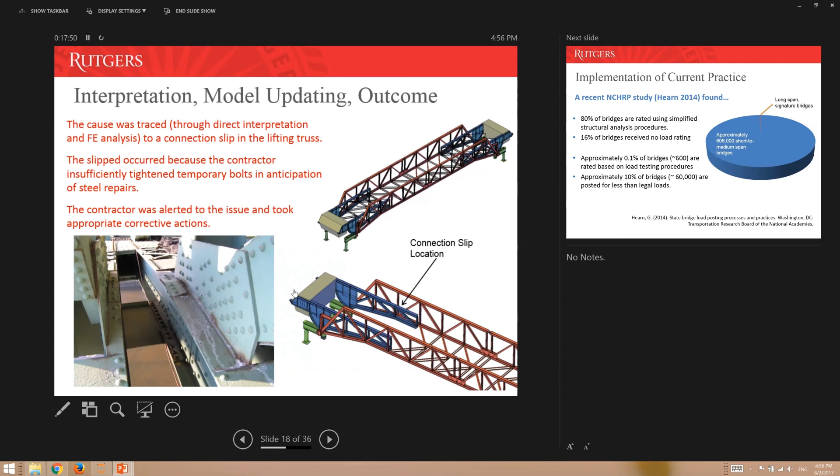So that's sort of some of the things that are going on with signature bridges. Here's the other problem, right? There's 606,000 short to medium span bridges. You can't see this, but this is to scale. That's the number of signature bridges in the US, right? So it's a small portion. Now they are 1,000 times more expensive on average, give or take. So they're not negligible in terms of the dollar amount, but in terms of the sheer numbers, they're pretty small.

And here, people really are not using any sort of sensors. Right? And that's one of the things, when I said I should have been a geotech, I think geotechnical engineering, at least from a civil engineering sense, at least recognizes that you need to go out and take data from the field. Right? I think in structures, we believe our models way too much. And it's like pulling teeth to get somebody to go and put a simple sensor out in a structure to say, is your model even remotely close?

And so here, you've got about 60,000 bridges that are posted for legal loads. So they basically say these cannot take the legal loads that we allow on our roads, 60,000 bridges. But yet, only 600 have ever been load tested. People aren't finding load testing as an attractive sort of cost benefit. They're not seeing value in load testing because they're not using it. All of these 60,000 bridges could be candidates for load testing to demonstrate the capacity.

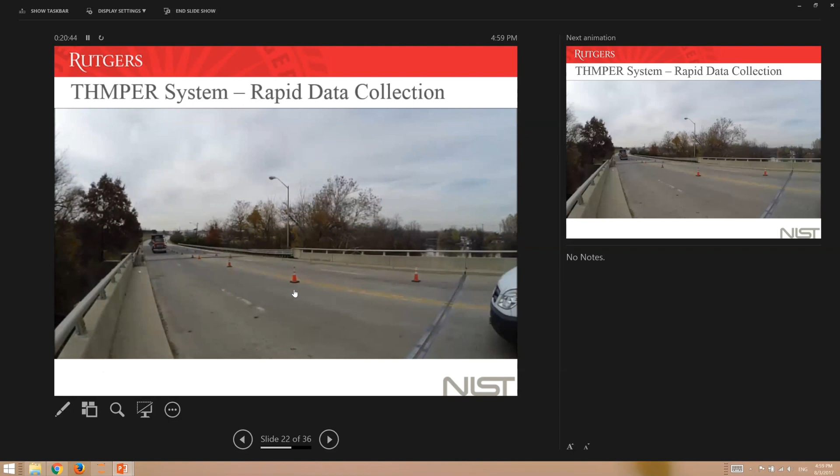But we'll see this, so I just want to show one thing. Everything's pretty much pneumatic except for the lifting of the impact carriage, which I think is still hydraulic.

It seats, you can't see it here, but there is a seating plate that's got a series of load cells underneath it. This is an impact carriage that gets lifted and dropped. These are fast-acting actuators that chase it and catch it. So we get one big impact, and then we get a nice free decay.

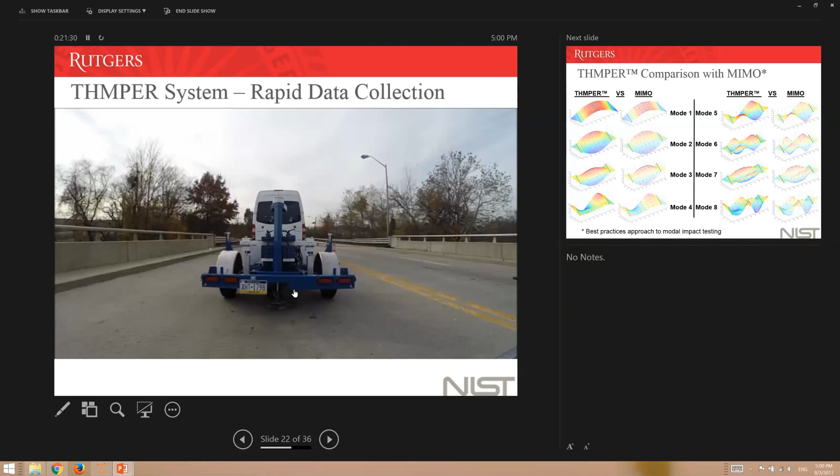And what the data looks like, there we go. So this is our thumper testing, same as your thumper except without the U, right? And this is multiple input, multiple outputs. So we have fixed sensors, we're going and impacting at different ones. That's what we would consider the gold standard.

But if you're looking at the modes all the way up to some of these higher ones, we're starting to get a little bumpy there. But we have very good comparison. We're generally within 1% of all frequencies. And the mode shapes, if you guys use these modal assurance criteria, MAC values, if you're familiar with those, we're generally north of about 0.9, 1.0 being perfect.

And we've done a number of bridges. These are, I think, 10 or 12 bridges that we did in the Northeast. And what we're doing here is plotting the bridge's first fundamental frequency versus span length. These are all different bridges: pre-stressed concrete, steel, and steel continuous.

A lot of people thought steel continuous bridges would be stiffer. Turns out they're more flexible, mainly because under the first mode there is no fixity. That continuous point is actually an inflection point over the pier. So I think we're actually systematically creating less stiffness in the continuous bridges, even though bridge engineers will tell you they're stiffer.

They're actually not. They made a tweeter into a woofer. Yeah, I mean, they got the big diaphragm versus the smaller, so to speak, and you change the frequency.

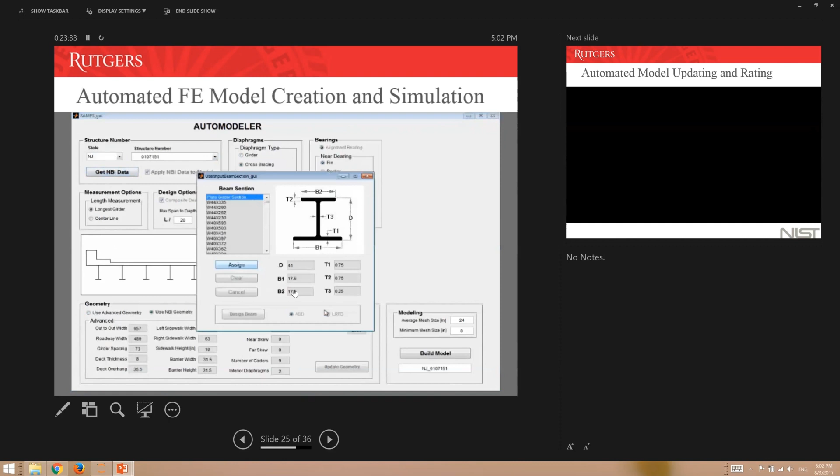We're then trying to reverse engineer, to the best of our ability, what those girder sizes are based on the codes that were used to design them. Of course, if you have that information, that's great, but a lot of states do not have that information.

But the nifty thing here is the ability for our MATLAB code to talk directly with a software called Strand 7. So anything you can do manually, you can also do in an automated manner. So that was real-time creation of a model.

And once you've created your model, you can then go ahead and update it. So we're now trying to look at the frequencies and mode shapes of the model and match those to the frequencies and mode shapes we've measured on the bridge, and change things like the connection stiffnesses between the deck and the girder, and the bearing stiffnesses, whether or not the barriers are participating, and all sorts of things that are very uncertain. We can now update those.

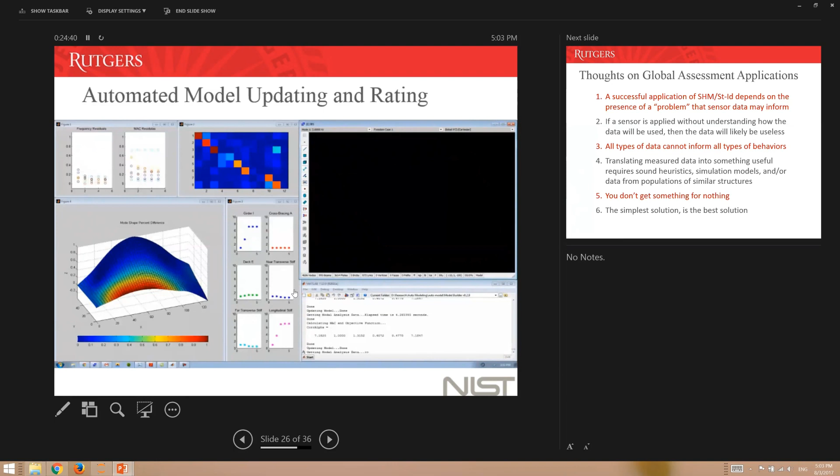You can see some of the parameters changing, and then they start to flatline. This makes the process seem very simple, but it is very non-unique. There's lots of solutions to that problem, and then you can do rating.

I'll skip this. So what I wanted to do now, before this is sort of a lead-up to the tour—we can maybe have a discussion there because I know it's getting a little late—I wanted to give you a brief introduction to the Beast Lab.

It's a pretty unique facility. We're very proud of it. We haven't quite used it yet, but we're about to.

And so the idea here is one of the problems with bridges, believe it or not, is that they take a really long time to deteriorate—roughly about 20 years before we start to see any meaningful deterioration. You might not think that's a big problem, but the problem is if I change something and do something new, it takes me 20 years to figure out if that was better or not than what I typically do.

And what we see with New Jersey DOT, New York State DOT, all the DOTs, is they try things once, and then they leave the bridge out there. So there are bridges in New Jersey that are twin bridges—one has epoxy coated rebar and one has stainless steel rebar—because somebody in 1994 decided, let's run a little experiment. And that experiment is now 23 years old. The jury is still out on which one is better.

The key is to accelerate this feedback loop. That's one of the reasons why bridge engineering today is really no different, some people may argue, than bridge engineering in the 1960s. We have slightly different materials and different code methodologies, but at the end of the day they produce very similar bridges, because we don't have innovation—we can't figure out if things work.

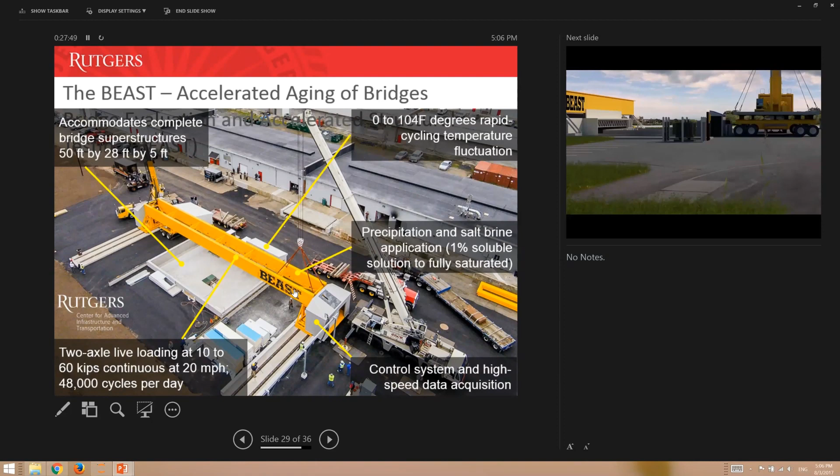So this is what we did. We built a laboratory with a very large environmental chamber that can accommodate a 50-foot by 28-foot superstructure, up to 5 feet deep. We have a rear carriage of a tractor trailer that runs back and forth at about 48,000 cycles a day, loading it up to 60,000 pounds—roughly double the legal load of a tractor trailer's rear carriage. It's an accelerated loading facility for bridges, not pavement. It can cool from 0 degrees Fahrenheit all the way up to 104, we can add precipitation and de-icing chemicals, and we can measure lots of stuff.

We have animations too, since we haven't done it yet, showing the bridge specimens being built off-site and driven about a quarter mile to the lab. The first one will actually be built in the lab, however. Basically, the lab opens up—the environmental chamber and the loading system are on rails, so they can slide open and closed, and can be positioned at any location along the bridge width.

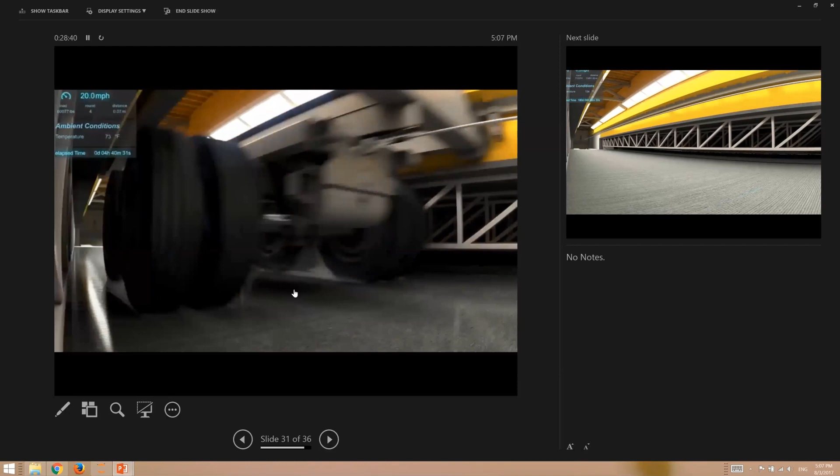So we can—here we go. We get the live load, temperature, environmental conditions, and winter maintenance effects. Those are the three keys to bridge deterioration, and the big question is how do we make sure we're balancing these properly.

We know if we just throw salt on something, we can get it to deteriorate. We want to balance the factors so they're indicative of what a bridge actually experiences in real life. If you've heard of the long-term bridge performance program, here at Rutgers we're involved in that, going out and taking data from a large population of bridges in the field to tune this system.

Nenad will run a demo of this too—he's created what's known as the Rabbit, the robotic assisted bridge inspection tool, which has 5 different types of NDE probes on an autonomous platform. We can take it out and scan weekly, even here, so we can identify when deterioration begins and how it progresses. That's all I have.

So, questions, comments?

Did you guys screw up in your testing of the bridge the last couple days? You should have started at a much lower level to see if you could detect the stick before it got nonlinear, where it stayed constant and then broke, however you want to phrase it. You just alerted us to a point we hadn't thought of, but we experienced the same thing with T-Rex—if you don't give it enough force to start out with, it sticks.